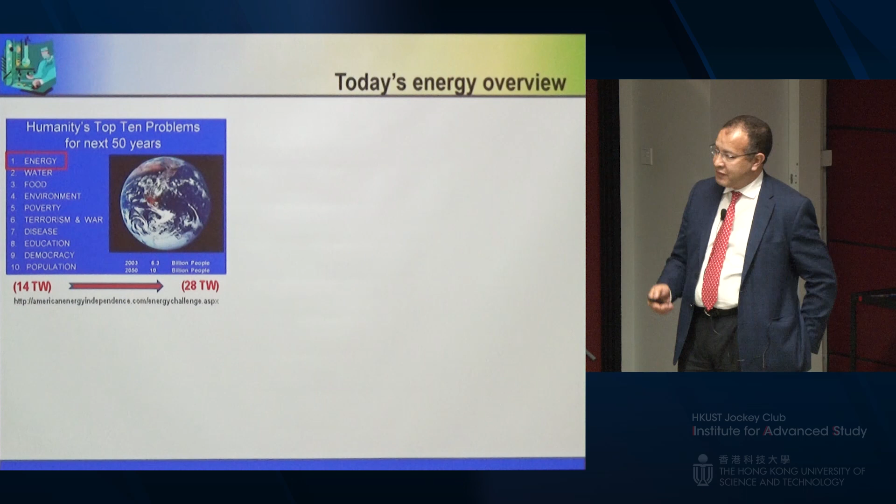The reason is within the next 50 years, the population will pretty much close to double to 10 billion, and the demand for energy will move from 14 terawatt to 28. If you look at the source of energy at the moment, it's still dominated by petroleum, coal, and natural gas. Nuclear energy is not popular at the moment, and the renewable, as you can see, is the lowest. Most of the renewable is hydroelectric and biomass. Solar and wind are very small, because there is no cheap, reliable, and efficient energy storage system to capture that energy and store it. You can see it also in this next one.

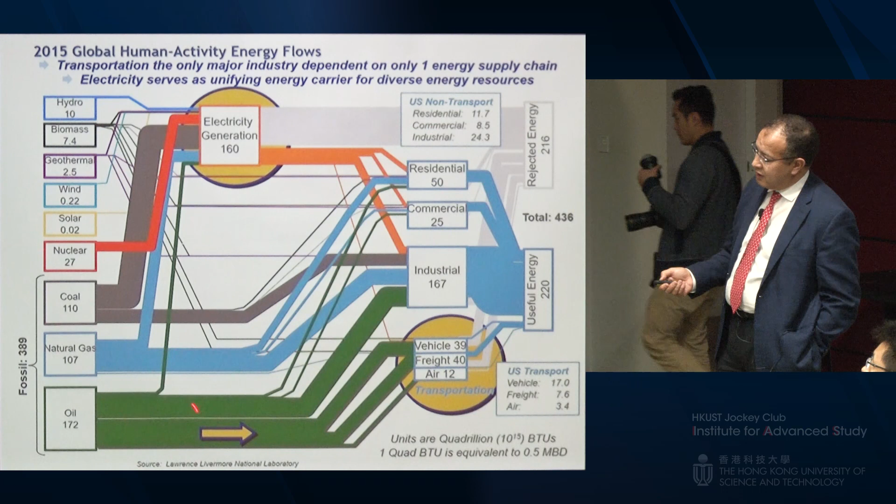You see the renewables participate very little in the energy resources for residential, commercial, and industrial. The big ones are oil, natural gas, and coal. For transportation, which is most important to us, the source of energy is oil, and the story doesn't end here because half of the energy is wasted in heat. So you use one source and you waste half of it. So the situation is very unsustainable.

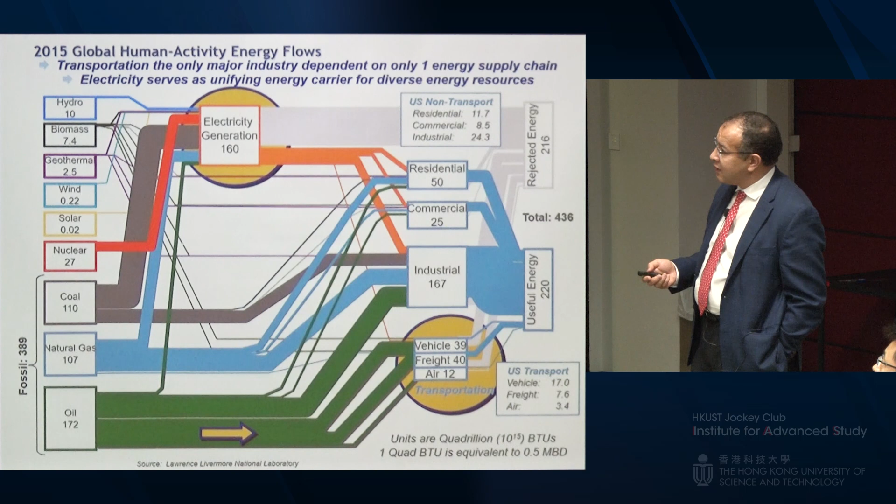In the United States, I think I've showed this before, we consume about 20 million barrels a day, and 72% of that oil goes to transportation. So if you really want to make an impact, you have to advance electric vehicles on a commercial scale.

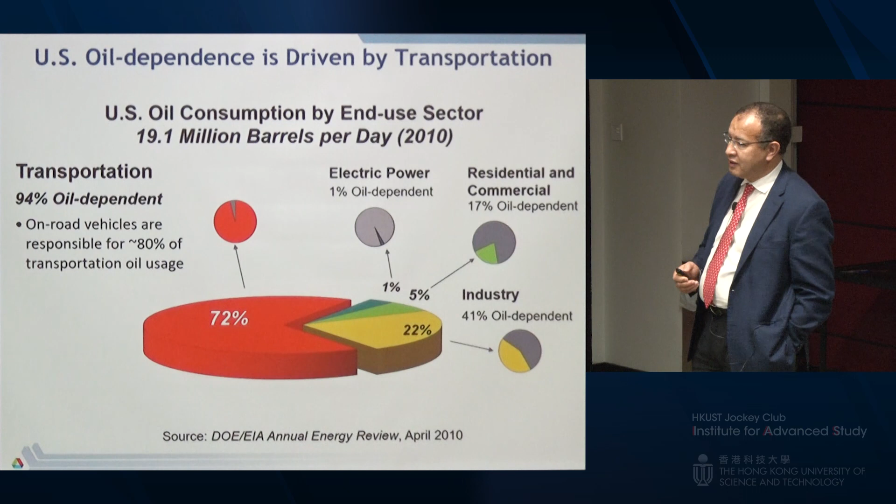The same thing with China. China, this is the trend of vehicle production. You can see China has actually already overtaken the US as the main producer of vehicles. And by 2020, they'll be producing over 25 million. And China actually imports more oil than the United States. Actually, the United States now exports oil. So the situation is getting very, very serious.

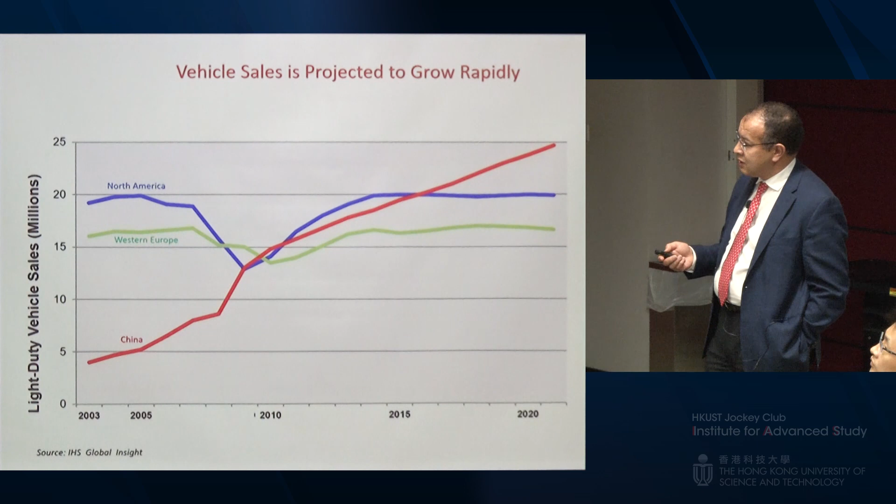Another reason why electrification is very critical is greenhouse gas emissions. This is the atmospheric CO2 concentration. If you stay business as usual, you will see that the concentration of CO2 will go to 700 ppm, and that translates to almost a 4-degree increase in the Earth's temperature. So obviously the consequence here will be that climate change will be very, very severe.

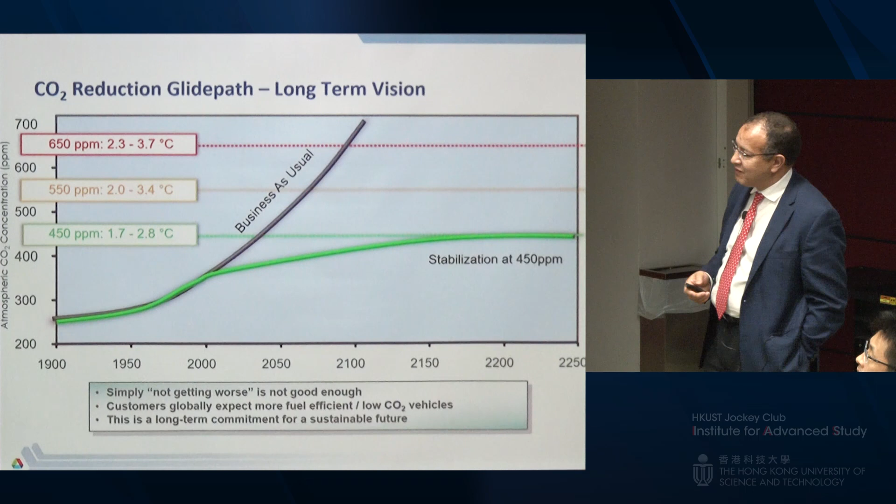But fortunately, electrification is underway. You can see it now. You can see a lot of Teslas actually in Hong Kong, which is interesting. And one of the main reasons is this, the regulatory requirement that was set mostly by Europe and China. The United States dropped this requirement thanks to our, I have to be careful because there is a video, our president.

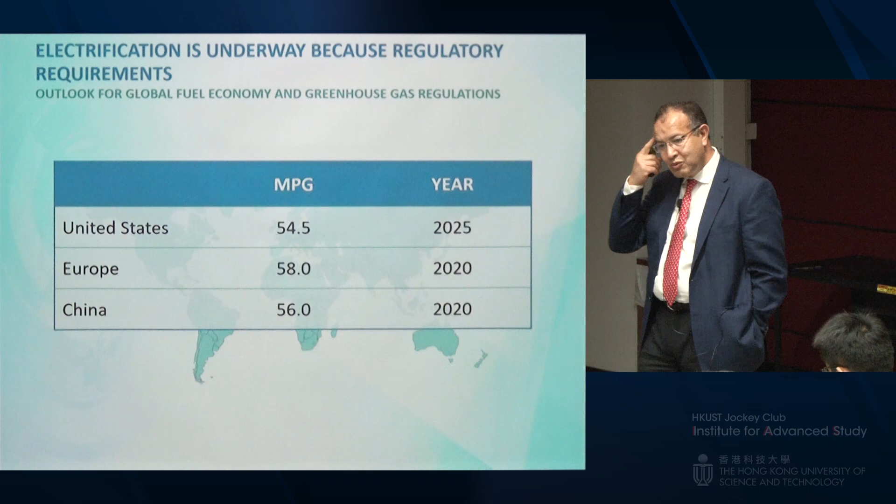But it doesn't matter because China is driving the electric vehicle. The requirement for China is 56 miles per gallon by 2020, in 2 years' time. It's not that much. There is also talk in China that they're actually banning the conventional engine within the next 15 years. Europe is a little more aggressive. It's 58 miles per gallon within the next 3 years.

The reason why I say it doesn't matter is because every single company in the world produces cars in China. GM, Ford, Chrysler produce cars in China. If they do it in China, they will just sell it in the US. So I don't see an issue. So the electric vehicle is moving forward.

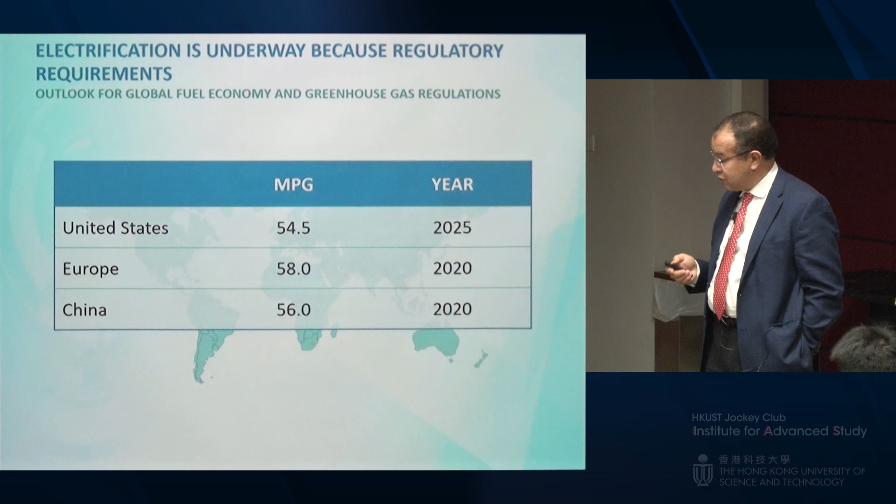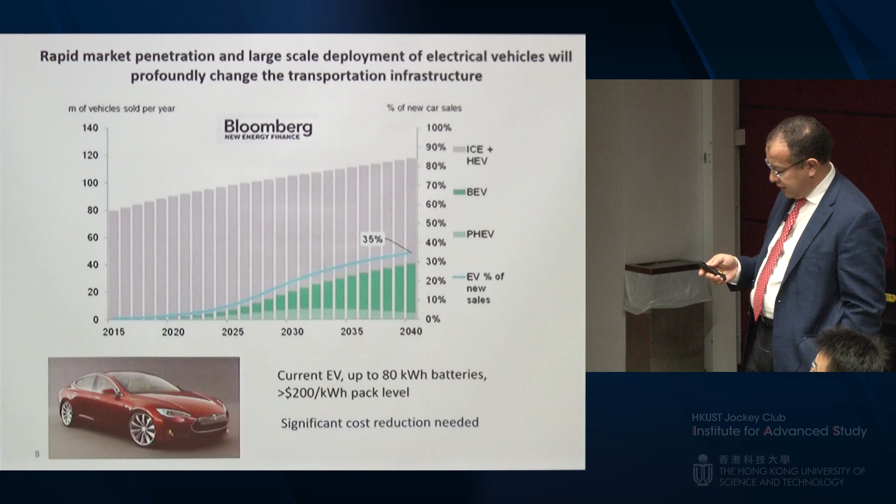And again, there are many types of electric vehicles. You have the hybrid, which is the most popular. You can see millions of vehicles now in the United States. We have over 7 million hybrid vehicles sold in the United States alone. The reason why it's very, very popular is because it's very cheap. The investment is very small, a powerful battery, and not energetic.

Usually 10% of the energy of this battery is mostly used to assist the main engine and recover the energy in regenerative braking. So you don't have to charge your battery. So that's very convenient and cheap. You can buy a Prius now in the United States for $18,000, and Toyota is making money out of it.

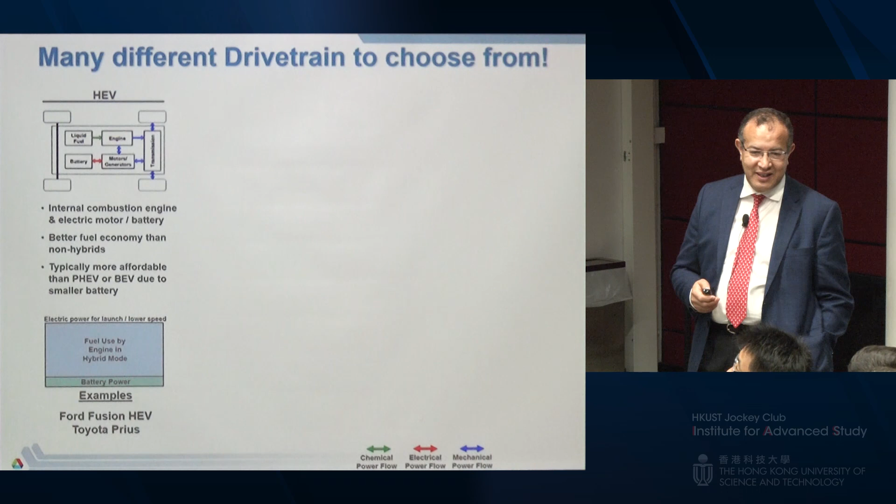The other system, which is much more complicated, is the plug-in. For the plug-in in the United States, the target is 40 miles because about 78% of commuters in the United States commute within 40 miles. But the technology here is very complicated. You still have an internal combustion engine. You have several electric motors, depending on whether you want four-wheel drive or two-wheel drive. You have a gas tank, you have a transmission, and you have a large battery.

So all of these are concentrated within a certain volume. So the battery has to be big enough to allow you to go all electric for 40 miles before you switch to hybrid in case you decide to go somewhere else, or you can go home and charge. So obviously the energy demand on the battery is very, very severe in this case, much more severe than in the electric vehicle.

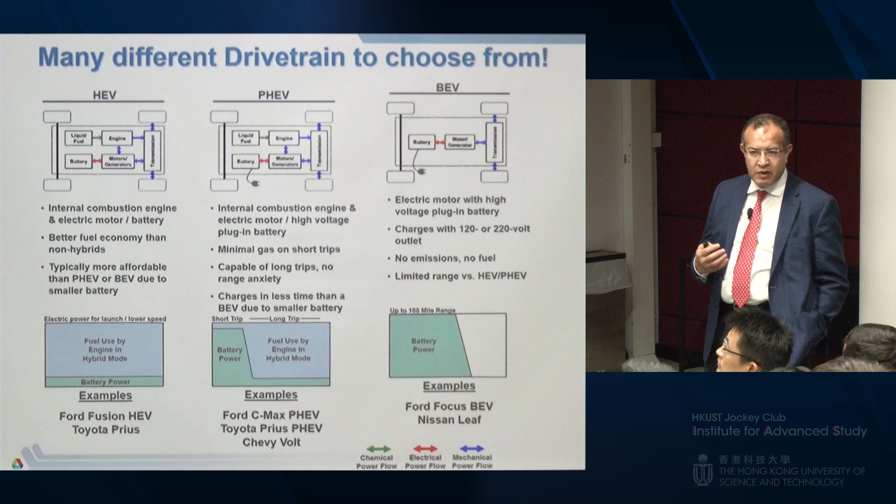The electric vehicle, you basically just have an electric motor and a battery. All the other things are taken out. So you have plenty of space to put a high energy battery there to allow you a longer electric drive range. But the popular one mostly uses the nickel metal hydride battery, which is a technology that is very low energy but very powerful. You can basically boost very quickly in this case.

The application obviously is very, very broad. Lithium-ion has basically dominated consumer electronics. So every single consumer electronic you are operating uses lithium-ion now. The next step is automotive, and we are seeing that at the moment, with about 20 models in the United States that use lithium-ion for hybrid, plug-in hybrid and electric vehicles. I'm sure in China there are a lot that use iron phosphate. And the biggest thing will be, of course, the grid. So I'm glad to see that you have a big program trying to develop storage for grid applications.

So one of the reasons why the expansion is still not very significant for electric vehicles and plug-ins is the cost. If you ask the car companies, the cost is the biggest barrier. You can buy a Tesla now if you can afford it, but not everyone can buy a Tesla. I don't know how much it costs in Hong Kong, but in the United States, it's $120,000. Yeah, so cost is critical. Safety and life, I think the companies have already made tremendous progress. You don't see a lot of cars burning.

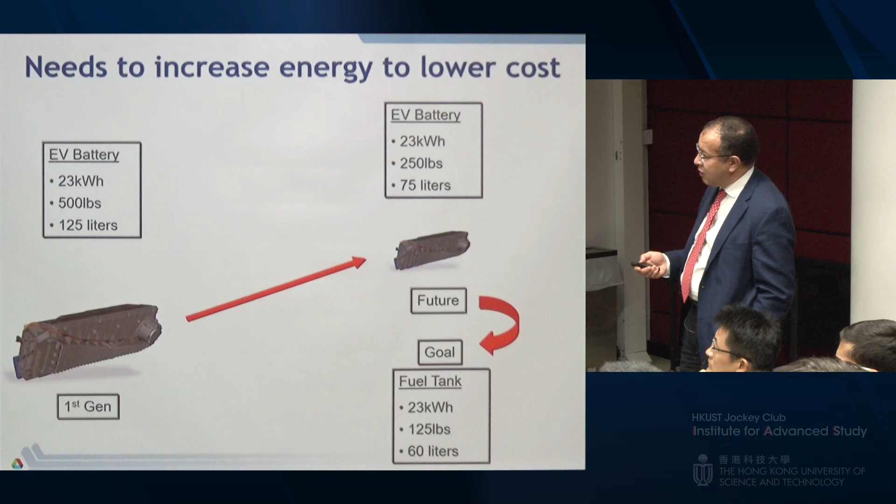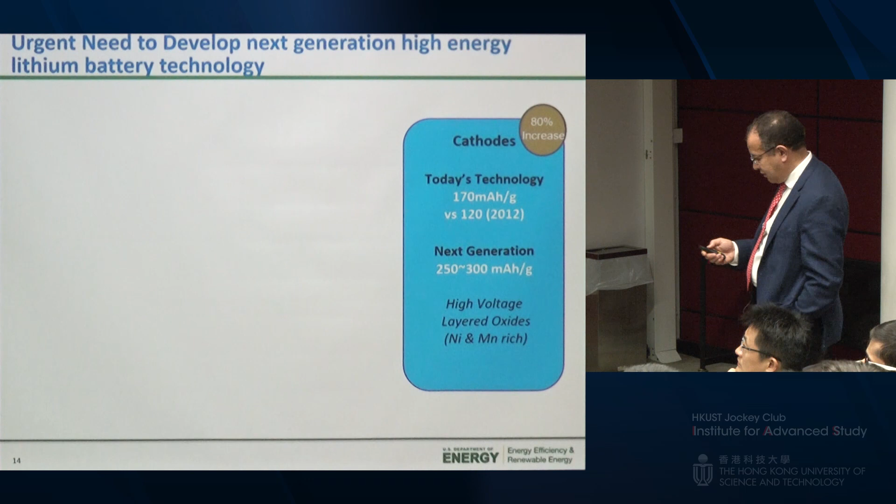So how to increase the energy? You can do that by increasing the cathode capacity. These are the conventional capacities at the moment. Moving to this is basically an increase of 80%. You can do that with the anode as well, moving from graphite, which has been the anode of choice for the past 30 years. There is a lot of effort now to move to metal or metal oxide-based intermetallic composite anodes. In that case, you have an opportunity to increase the energy density by 300%. So by coupling these two systems, you can make a significant impact on the energy density of the full system.

So I'm going to give you an example of things that we developed, which you are going to see in the market, and which have been licensed by several big companies. And there is a big effort to scale up what I'm going to show you. Then I'm going to mostly focus on beyond lithium-ion, because I know that some people here are working on sulfur and lithium-air, so I'll show you some exciting work there. Okay, let's start with the cathode.

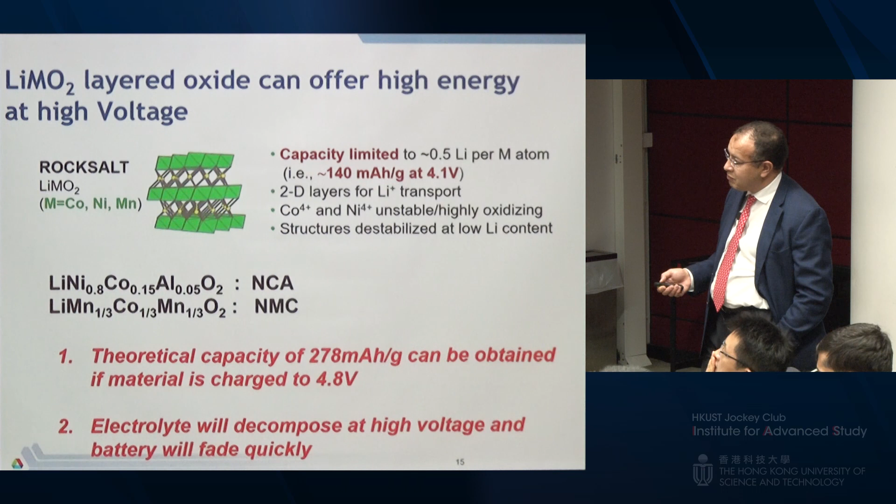Now, take for example NCA, this is the Tesla technology. They use a very high concentration of nickel. When you charge this system at high voltage, let's say 4.1 volts, you can pull a lot of capacity out of this system. If you go higher in voltage, you can get almost close to the theoretical value, but the problem is at this level the material is very unstable, so it decomposes the electrolyte. Here is an example. If you charge to 4.5 volts, you get a very large capacity, almost 230 milliampere-hours per gram. But then if you cycle it, it drops very quickly. So you get the energy, but you lose the cycle life, which is a problem.

So one of the reasons why the cycle life is basically compromised: we look at a material or an electrode here, once we disassemble the cell, and take one particle and microtome it in half and look at it by high-resolution transmission electron microscopy to see what is happening at the surface. And this is what you get.

You have the layers where lithium is basically sandwiched between the layers, and then you have another phase and another surface film. So through electron diffraction, this phase is nickel oxide. This one is basically R-3m layered oxide. So what happens is when you take this material, you remove lithium at high voltage, you create this phase, which is thermodynamically unstable. Nickel 4+ doesn't exist in an oxide phase. You have manganese oxide as 4+, but nickel always reduces immediately and generates oxygen.

So this phase here is nickel oxide, that's what you see here, and the oxygen reacts with the electrolyte and gives you a surface film. Now we have a very large SEI where lithium has to struggle to go through it during charge and discharge. And as a result, you lose capacity because your interfacial impedance grows significantly. That's how you lose the cycle life.

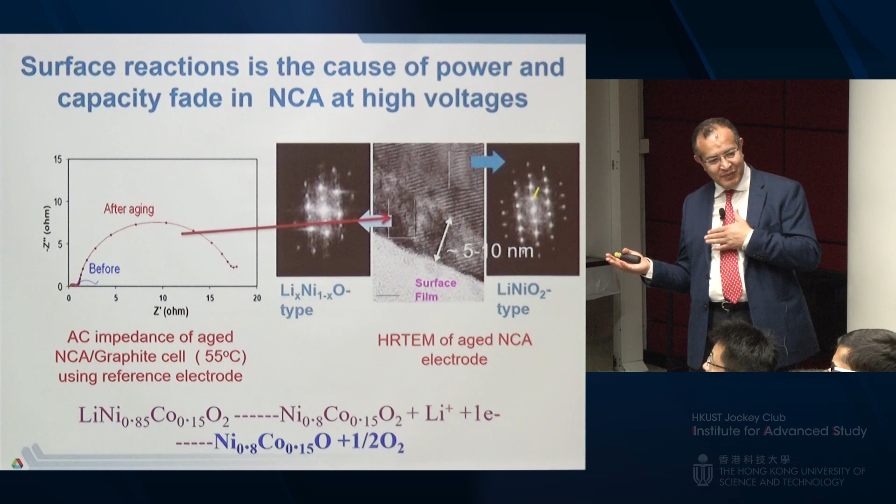Now, what we learn from all this is that when you use a very high nickel concentration in a cathode, you get very high capacity. But then you have a problem with cycle life. So to address this, we developed this material that now has been licensed and is being mass scaled up for application in electric vehicles. We call it a full gradient cathode material.

This is the first time where you have a material that has many compositions across the particle. You start nickel rich to give you the energy and slowly reduce it and increase the manganese to get more stability at the surface that prevents that reactivity with the electrolyte I showed you. So a very clever approach by engineering the particle.

And the reason why we go slowly is because there are volume changes. So if you make a big composition change quickly, you create a different gap in volume, and then you have a kind of separation. So you have to be careful about that. So that's the reason why we did a full gradient. The full gradient will allow you to put as much manganese depending on the particle size.

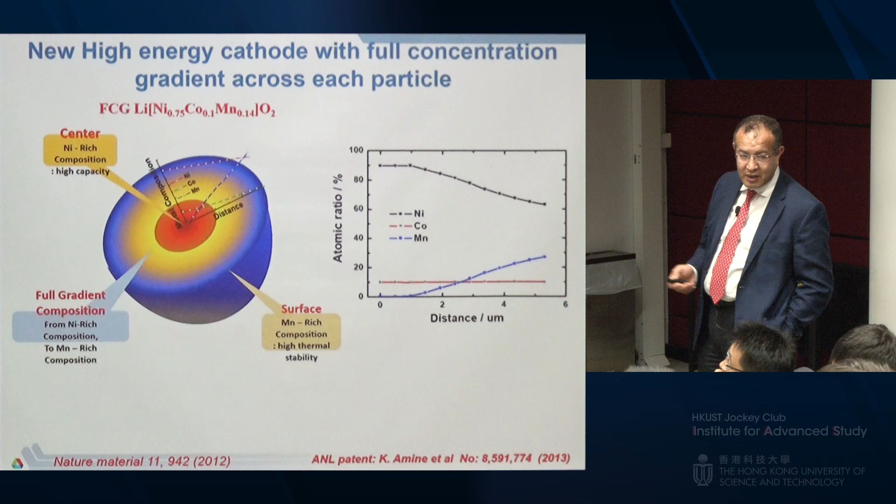So how do you make it? That's the next step. Could you scale it up? And you can just use a simple co-precipitation. This is a very well scalable and mass-produced technology for the NMCs and the NCAs that I told you about. In the case of nickel manganese cobalt that is commercially available for automotive now and consumer electronics, they use only this. They put 3 metals with defined composition in a sulfate form, and they send it to the reactor. You have a chelating agent and a co-precipitating agent, and you make basically particles.

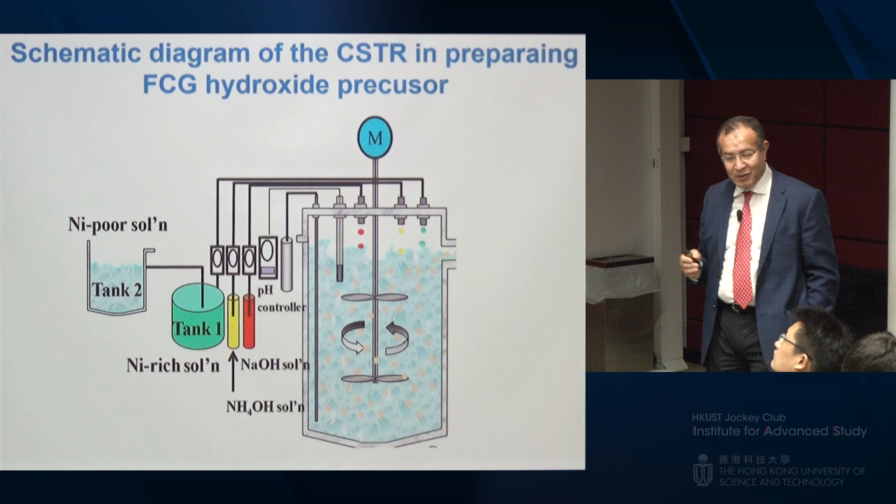So with this new approach, you just add one more tank. That's your investment. One tank that has nickel rich, so you can put the nickel first in the bulk, and then one tank that has manganese rich. Cobalt can be the same composition if you want to keep it constant across the particle. And then once you start moving the nickel to the reactor, you basically dilute the nickel with manganese and send both. With time, you're changing the composition. So one company that licensed it has already scaled up this material to 10 tons a day. So there is some serious work going on now.

Here is the comparison between the existing technology that is in electric vehicles now, like in BMW or the Chevy Bolt from GM. They use the 622 nickel manganese cobalt with 60% nickel. They're both made by co-precipitation now. This one is spherical in both cases, but if you look at the primary particles, in this case, they are spherical, small, where lithium will go through the grain boundaries. In this case, we have rods, so it's very different, but dense rods. That's the reason why the density is higher.

This is the same composition. This is the same average composition because the composition here is changing from the bulk going to the surface. Remember that. But the reason why we have high density is because of this structure. It's totally different from here. Now, density means energy.

Because you pack more active material in the electrode, keyword. The energy is capacity, voltage, and density. Remember that. If you use a nanomaterial, then you drop your density significantly, and therefore your capacity at the electrode level significantly as well. The other thing we've seen is that the gradient approach is also at the primary particle.

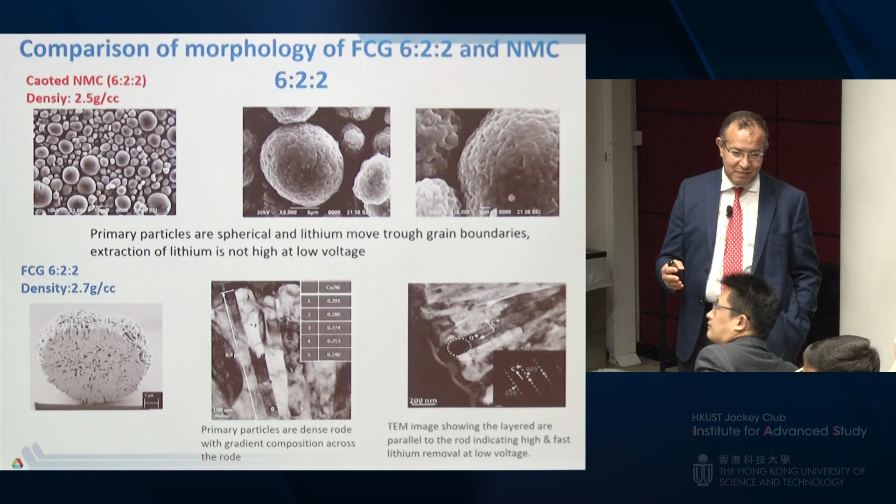If you look at the composition here, it's changing as well. So it's not only at the secondary particle, but the most important thing of all this is this. This is a TEM that shows this rod here; the layers are parallel to the rod, which means lithium will fly out quickly. And that's key to fast charging and discharging of the system. So you move lithium faster, which means at the same potential, you may move more lithium here than here, because here the lithium has to go to the grain boundaries, so you don't move as much.

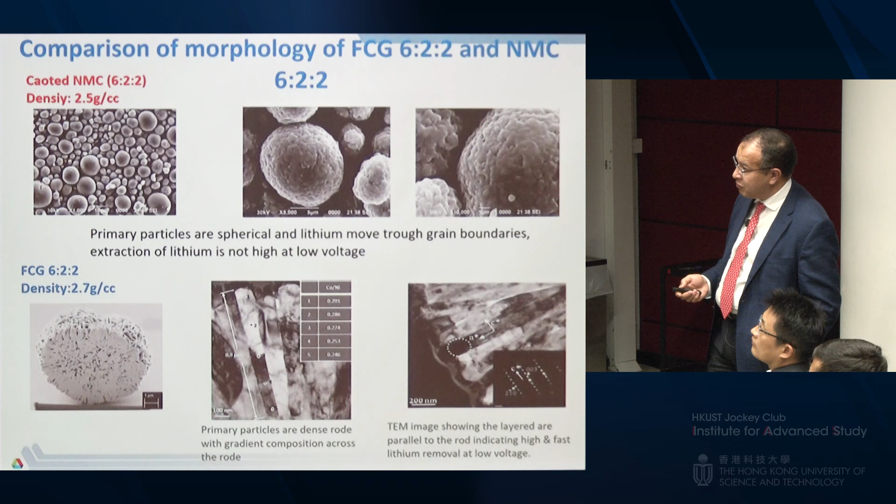Which means the capacity of this material at the same cutoff potential or voltage will be higher here than here. And actually, we've proven that. This is the capacity using exactly the same condition. With the commercial NMC 622, we get about 178 at about 4.3 volt cutoff. Here we get about 225 because of that specific morphology, which is very critical. So morphology of material can also impact the performance of the material. Remember that.

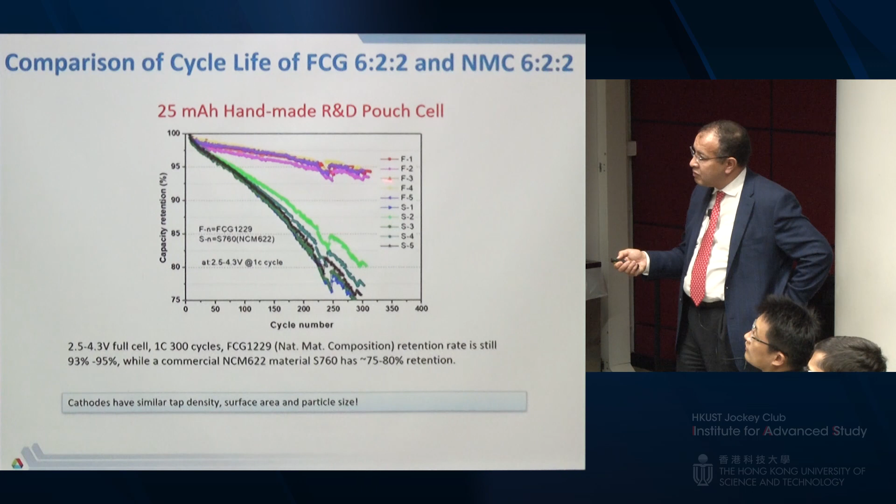So eventually after that, we start looking at what is the performance at the full cell. And this is a small 25 milliamp hour pouch cell we made at Argonne, and we compared the performance at 4.3 volt. You can see that the commercial one is dropping pretty fast. Within 300 cycles, we lost almost 25% of the capacity. With the new gradient, we have far much better results. We also work with the industry and build bigger cells. Well, let me show you.

Of course, one of the other reasons why we're trying to stabilize the surface is to enhance the cycle life, but also enhance the safety, because oxygen reaction with the electrolyte is exothermic, and therefore you can create a thermal runaway if you don't control it. So this is a DSC of these two materials, so we compare apple to apple. You can see clearly that in the case of NMC, when you fully charge it to 4.3 volt and then react it with the electrolyte, the enthalpy of reaction is higher, about 1,000. And the onset temperature is also higher, better than the NCA, but it's lower than in this case here, where you have half the energy and higher onset temperature. So the safety of this material is much better as well.

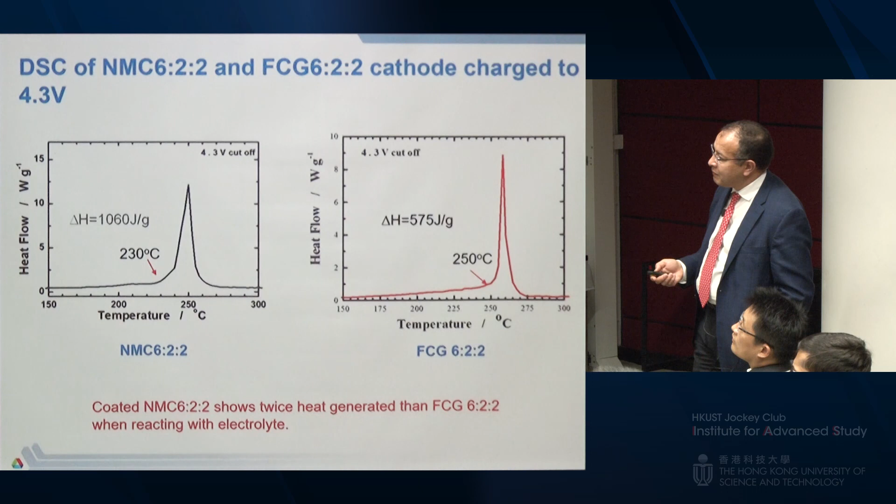So we hit two birds with one stone. We improved the cycle life, we increased the energy, and then we increased the safety. Three birds, I would say. We also looked at much higher concentration of nickel, 80%, because here you get much higher capacity, obviously. And we built cells. These are basically 2 amp hour cells, well balanced with electrolyte additives, because we operate at high temperature. And you can see we use the Umicore, which is very popular, as the reference material, and our full gradient at the same composition.

And you can see the conventional one that is under development by the auto industry drops very fast, because now you have more nickel. Therefore, the reactivity is much higher, while the new material is much, much more stable. Even the performance at high temperature is better than the performance of the commercial one at room temperature. So this is very important. The reason why I say this is very important: if you look at Tesla, they use NCA, which is 80%. And you notice they don't use big cells, because that material is very unsafe. If you have a large cell, it will explode. They use small cells, I think about 8,000 of them.

If you go and look under the hood of a Tesla, you see about 8,000 18650s. That's the reason why they developed, they're very smart, a matrix design to control all these thousands of cells. But when you have thousands of cells, the cost is very high, and that's the reason why Tesla is expensive. But imagine if you switch that material with this one here, where the safety is better and the energy is higher. We did a calculation, we dropped the number of cells from 8,000 to about 4,500. That's a significant cost reduction, because you can increase the size from 18650 to a D size, for example, from like 5 amp hour to 10 amp hour.

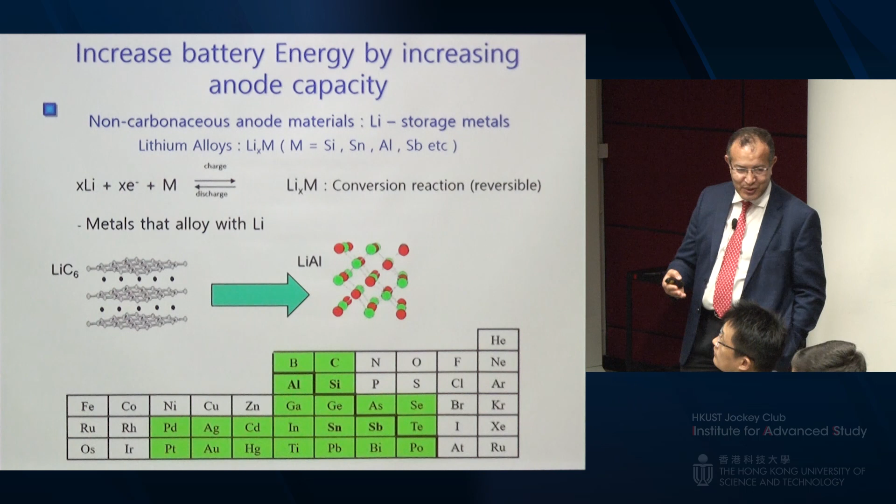You have a whole bunch of metals that you can alloy lithium with. And obviously, silicon is the most attractive because it's dirt cheap. You have plenty of it in the earth. And it also gives you higher volumetric and gravimetric energy density than other metals. It's almost 10 times graphite.

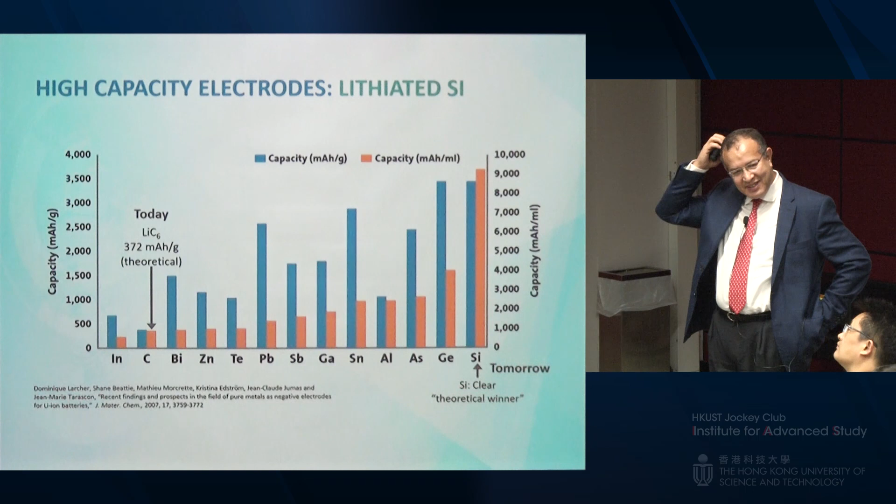So obviously, you're not going to use all this, and I'll explain why. The reason is simple. Using that much, you have no cathode to match this capacity at the anode side. It's impossible. You have to make a 1 millimeter thick cathode if you want to go there.

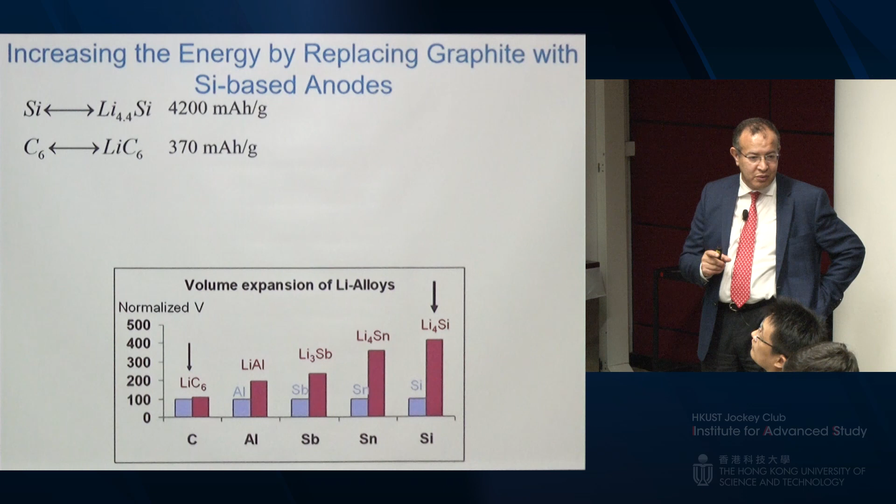Unfortunately, when you do the alloying, you get a lot of capacity, but you have huge expansion, volume-wise, almost 400%. That's not good. If you have a big expansion, you expect, after cycling, cracking of the particles and isolation. So when you isolate your particle, you lose conductivity, and that particle is dead. So your capacity will drop very quickly.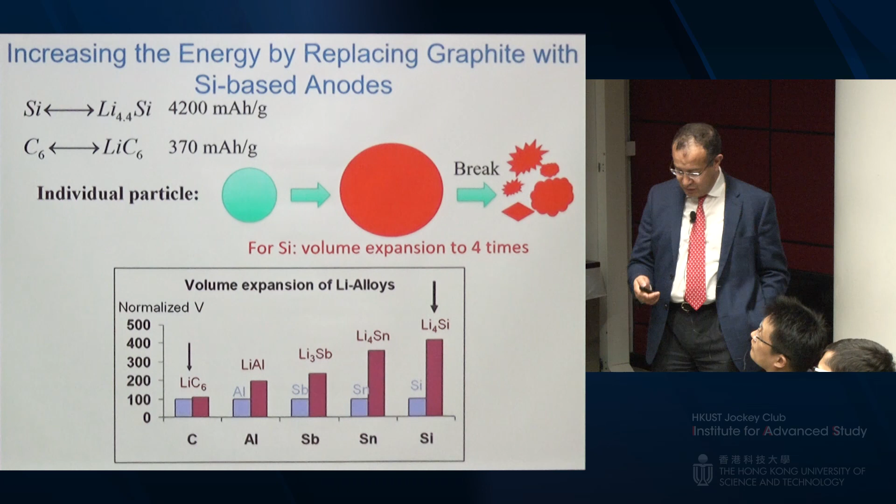Much work has been done in the literature, basically incorporating silicon in a carbon matrix to keep conductivity. They incorporate silicon in carbon fiber, nanotubes; my colleagues at Stanford use the yolk-shell type where they incorporate the silicon inside carbon spheres and so on. All this shows a very good result. I'm not sure about this result because the loading is very small. It's like using shallow charge and discharge. So one has to be very careful.

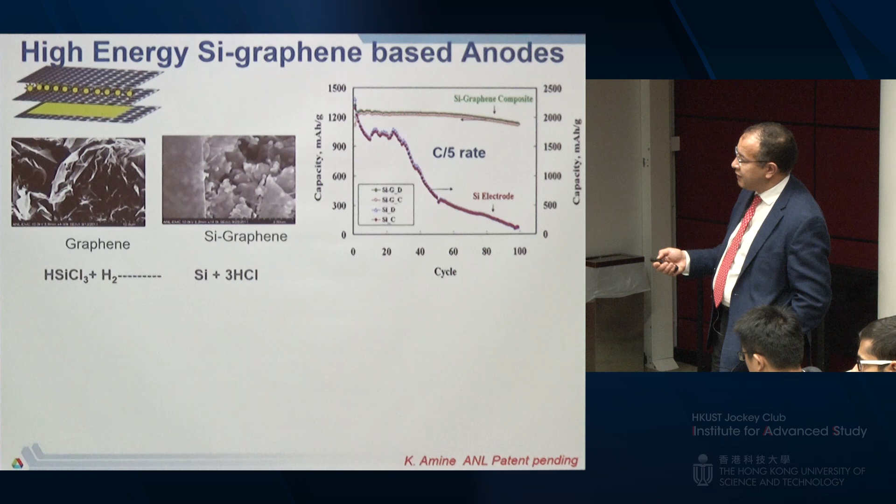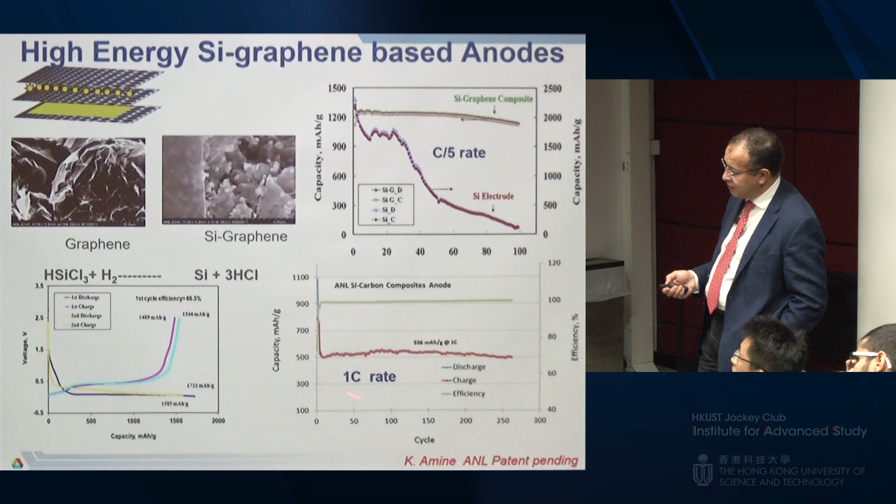So this is how it works in the silicon wafer industry. They have these tanks full of this gas. So they capture the byproduct, which is contaminated trichlorosilane. And then what you do, basically throw in graphene and heat it up at low temperature, drop in 10% of hydrogen, and then you form your material. Very simple. You hit two birds with one stone. You get rid of this dangerous gas, and you make a useful material out of it. And one of these companies has licensed it, and now they are in the process of mass scaling it. So you may see it actually next year.

So here is the other problem with silicon, the poor efficiency in the first cycle. Now, this is a discharge. The discharge is about 1,700, and the charge is 1,500. So the difference is about 200 milliampere hours per gram. This is one of the best samples, by the way. There are samples that have more than that. So imagine 200 milliampere hours per gram.

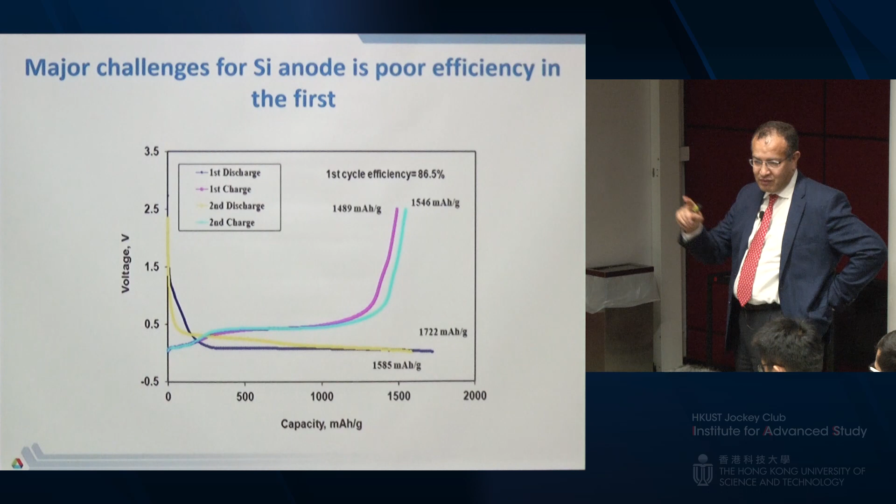If you use carbon, carbon is about 98% efficiency, and is only 360 milliampere hours per gram. So 2% out of 300, you can easily design an excess amount of cathode to take care of that irreversible loss. Here it is. In the case of graphite, it's 98%. So it's okay to use excess cathode, the lithium, to compensate for that irreversible loss.

But in the case of silicon, the capacity can vary, and the efficiency is low. There is no way you can use a large amount of cathode. You need pretty much double the capacity of excess cathode just to compensate for the first irreversible loss. Cathode is expensive and heavy, so your overall energy will drop significantly. So that's not the way to go. But I'm going to show you a very clever way of doing it based on our lithium-air work, actually.

If you use a cathode, that's the capacity. Use a lot of it, heavy, expensive. If you use lithium oxide, the capacity is very high. It's lightweight material, almost 1,600. So, unlike most people, who try to add lithium to the silicon and add electrolyte to basically suck the lithium inside the silicon to take care of the initial efficiency, here you take lithium oxide, you mix it with the cathode, you activate it, and you send lithium to the anode. It's a very different approach.

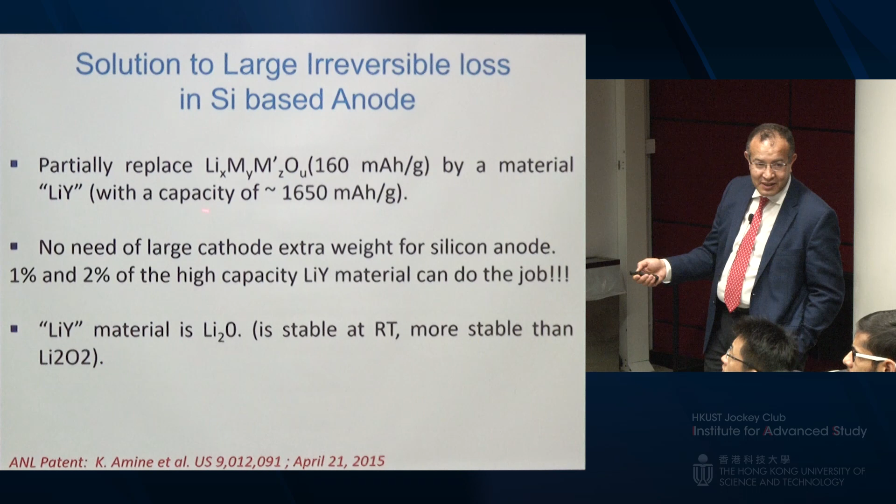So you can use this, or you can use lithium peroxide. Lithium peroxide will give you twice this energy, so the amount of material needed will be much smaller. Here is an example. We take a high energy cathode, we add a small amount of lithium oxide, and you see we get huge capacity.

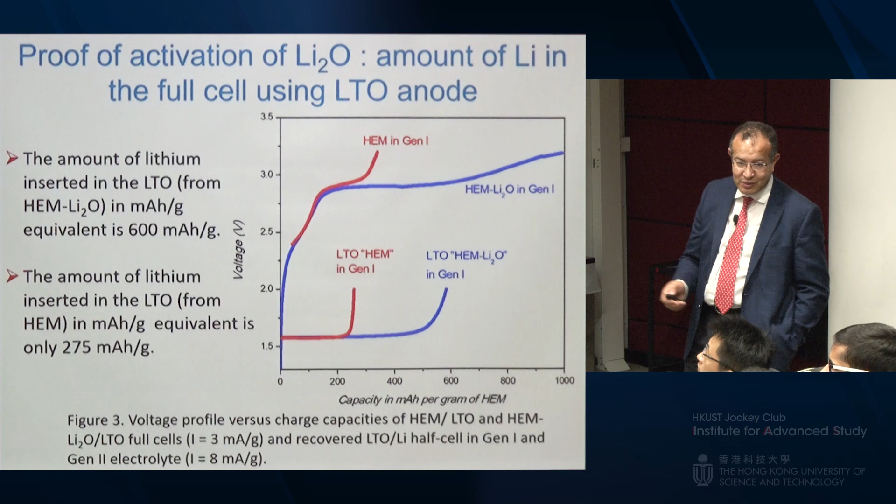Just 1%, you get almost 300 milliampere per gram. Obviously, you may think we are operating at high voltage, and therefore this could be just a decomposition of the electrolyte. So to prove that, we actually took LTO. LTO has 100% efficiency, so you can design your cell to get you the capacity you need. For example, in the case of high energy cathode, you can design LTO to match it, and you get about 250. That's the capacity of the cathode. So if you add 1% of lithium oxide, you can see there is a huge capacity, and you recover it at the LTO, which means that lithium really comes from that lithium.

And we took an example of a poor efficiency material that has 70%. We use it without lithium oxide. You can see we use a cathode that should give us 250 milliampere per gram. That's the high energy lithium-rich, manganese-rich cathode. But we got only 176 because we lost a lot of it to the silicon to take care of the irreversible loss. We add 1% lithium oxide, and you can see we recover all the capacity of the cathode because the lithium was able to provide the lithium to the silicon, and now you can cycle the capacity of the cathode easily. So this one also has been licensed because it's very simple. It's cheap, just 1% of material that is commercially available.

So if you take all these technologies and put them together, this is a company design, you actually can achieve 350 watt-hour per kilogram and 1,000 watt-hour per liter with this system. That's an increase of almost 80% versus the Tesla technology, right there. And at Argonne, we do have what we call BatPaC. I think this is open source. You can actually download it and use it. This is very nice because it has a huge design that goes all the way to cost. So you can design the whole pack. You take your chemistry, you put some parameters, and it will tell you where that chemistry stands versus existing technology. And it will also tell you the cost.

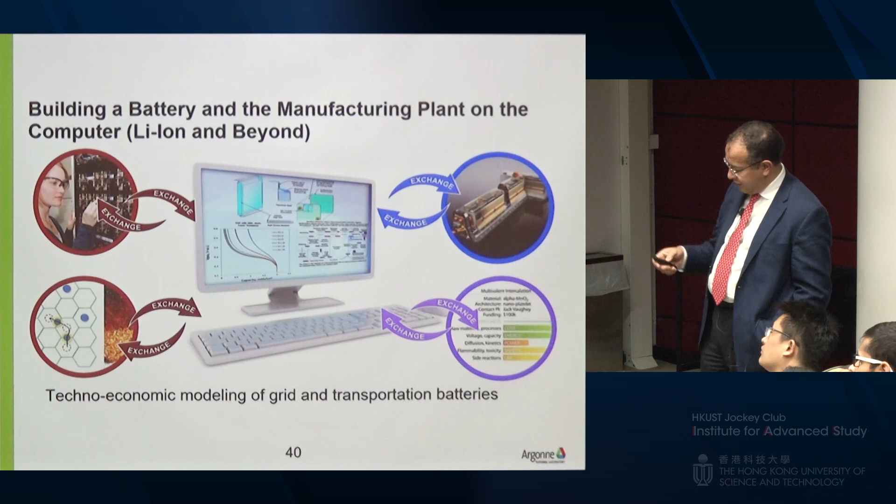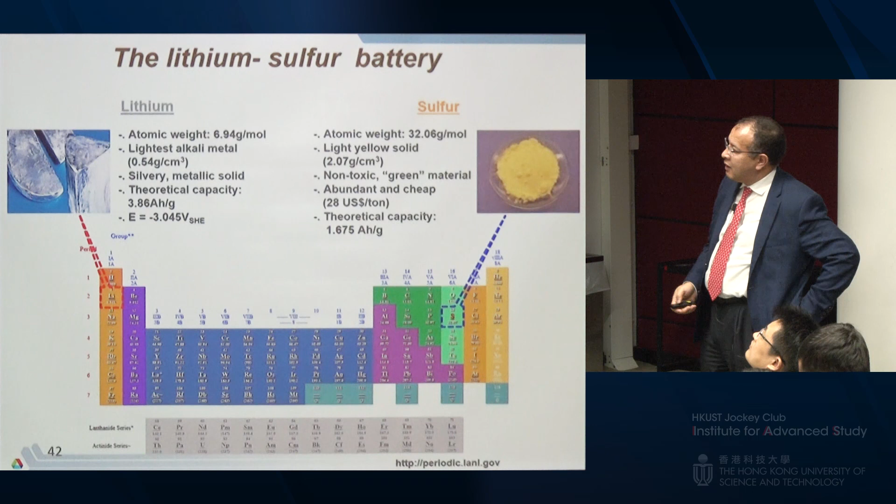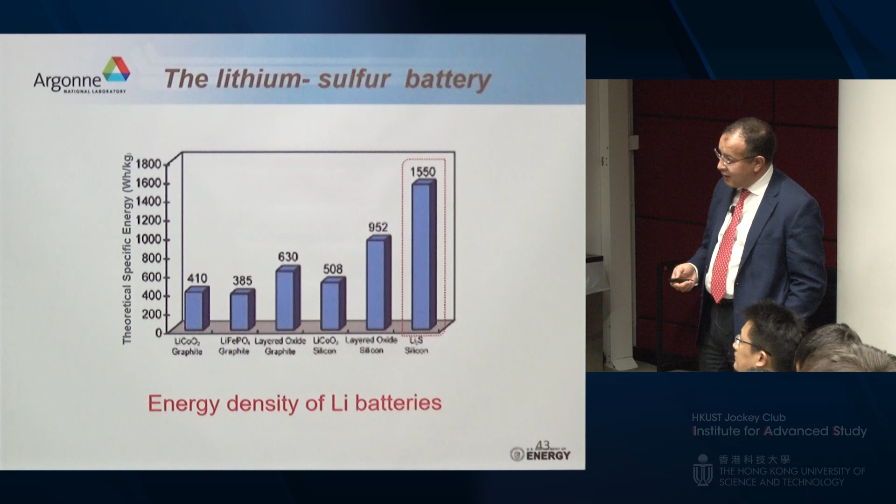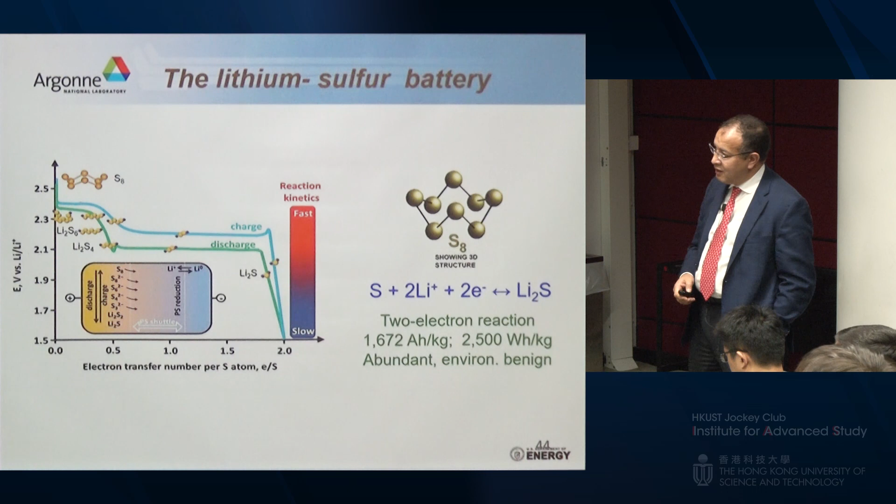Okay, why sulfur? Sulfur obviously is dirt cheap. I think you can buy it for $28 a ton. As a matter of fact, if you go to Saudi Arabia, they have mountains of it because it's a byproduct of the petroleum industry. That's one reason. And the other reason is it has very high gravimetric energy density, 3 times lithium-ion. Not only cheap, but it gives you 3 times more energy. And one of the reasons why it gives you that much energy is because it's a 2 electron reaction, not 1. During the discharge, you have multiple phases, polysulfide that is formed. And that's a problem.

I'm going to summarize all these issues here. You can see these are the challenges. One of the problems is sulfur is insulating. It's 10 to the minus 30. So you really have to put a lot of carbon to create some conductivity at the electrode level. So if you do that, you're going to use a lot of inactive material, and that can drop the capacity. Some people use 50%. So you have to maximize the active material in your electrode to get the energy you need. So that's not good. The other thing is you have to figure out a way to put high loading. That's one of the problems with sulfur.

And then there is an expansion of volume when you move from sulfur to Li2S, for instance, almost 80%. You have to take care of that as well. And then you have the polysulfides that dissolve, and they tend to shuttle to the anode and then stay there. And that's loss of active material. You're losing sulfur.

And the other big problem is lithium metal. The dendrite issue with lithium metal, that is a big issue. So you can see this is a very challenging system. So I'm going to show you, at least at the cathode side, we're able to take care of conductivity and dissolution issue, which are 2 major problems.

At the moment, most of the people, if you look at all the literature, pretty much without exception, and one advice to you guys, you have to think outside the box. You know, if you just follow what the other guy is doing, you're going to just be late because they've already done it. So if you look at all the literature, that's what they do.

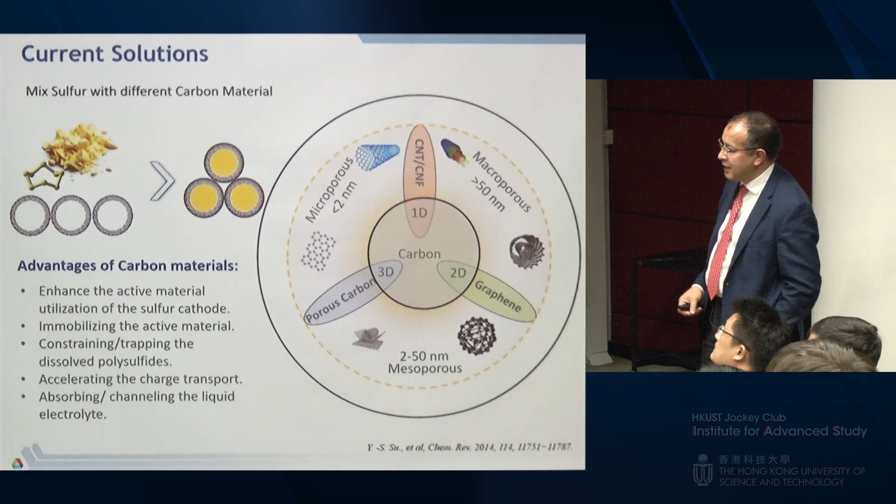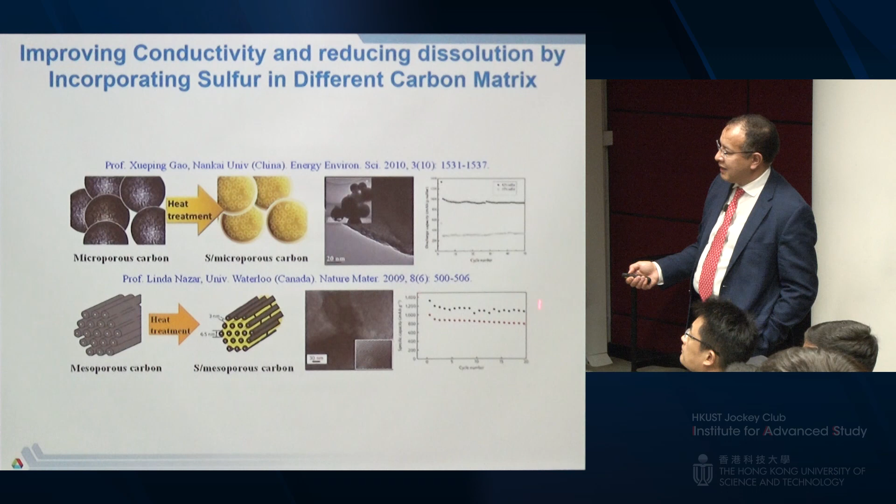Now, I'm going to show you a different way. If you look at the periodic table, sulfur is here and selenium is here. If you look at sulfur, you get high capacity, but the density is lower. Volumetric capacity is that much. Very insulating, which means you have to put a lot of active carbon to create conductivity.

And it melts at very low temperature. You have to worry about that. Because if your temperature of cells goes up beyond 115, you will melt your sulfur and basically short the whole system. Now look at selenium. Selenium has low capacity, but high density, so volumetric energy is the same.

But look at the conductivity. It's 20 orders of magnitude higher. So that should take care of the conductivity. And then the melting point is much higher, which means you have to worry about lithium metal before you can worry about this.

So the idea here is, obviously, one of the problems that I didn't show here, I should put it to be honest, selenium is $60 a kilogram, which is, you can buy 3 tons of sulfur with that. So that's the problem. The cost is an issue. But $60 is not that far from lithium cobalt oxide, which is about $50 at the moment. But in automotive, it's unacceptable.

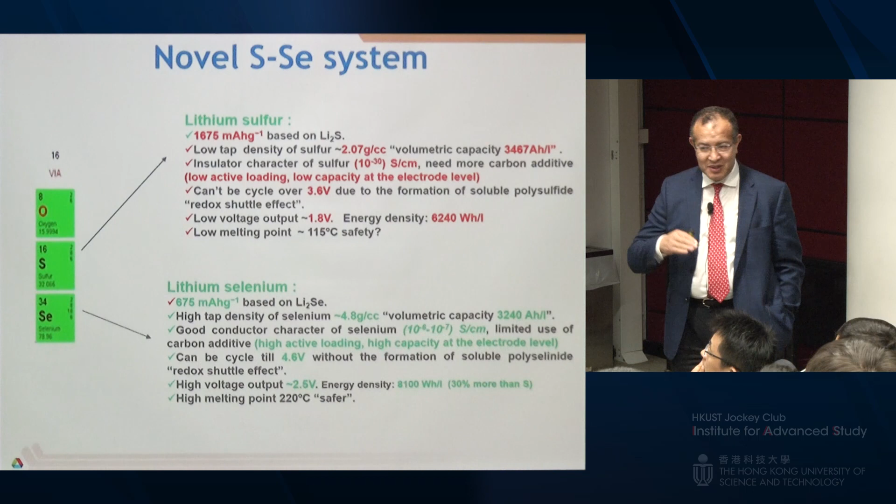So the first thing we want to know, is there any polysulfide or polyselenide dissolved in the electrolyte? And there are not too many techniques out there to do that, but at the Advanced Photon Source at Argonne, because X-ray will just look at crystalline phase. In this case, you get mostly amorphous, so you don't get much information. But you can use XANES.

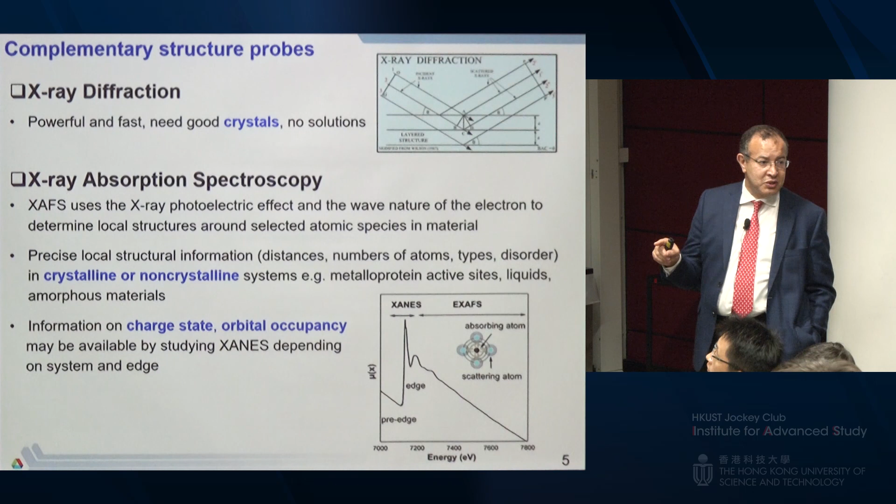XANES is a very good technique to look at the oxidation state, and it can give you that information at the crystalline phase, amorphous phase, and liquid. So you can probe the electrolyte and the concentration of the polysulfide and polyselenide and their oxidation state as well, in operando. So we do have this technique that we developed, and here is what you get.

So when you try to fit it with two-phase without any dissolution, it doesn't fit well, obviously. But when you add the polyselenide, it fits very well. Then you have a program to tell you at what time a phase is starting and what time it disappears, for instance. So that's a problem. We were very disappointed because we were able to improve the performance by putting high excess of the active material, but there is a dissolution, and therefore your capacity failed eventually.

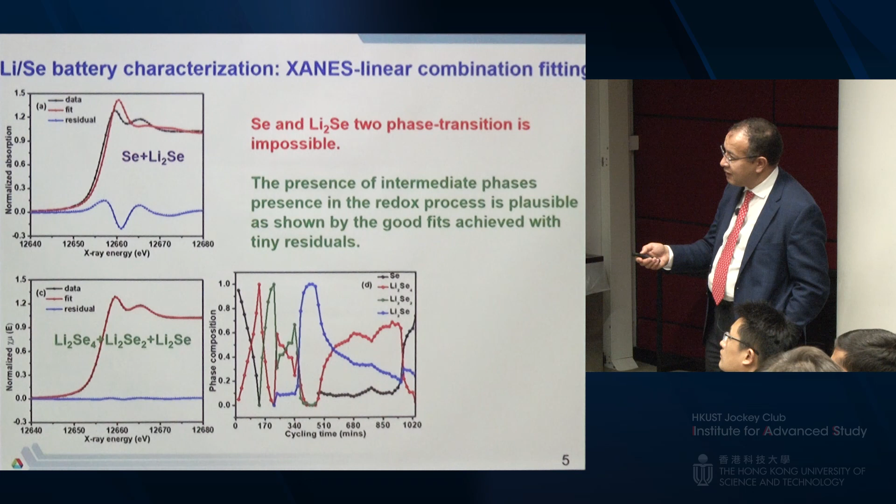Then when we ran the carbonate-based electrolyte, we've seen a different story. See, it's flat. We don't see those multiple phases, but the polarization is very high. So the performance was very poor because the impedance was very high with the carbonate. Now what we learn here is that if you use a different electrolyte, the story is different. So now we have a hope. We need to find the electrolyte that can work with this new system.

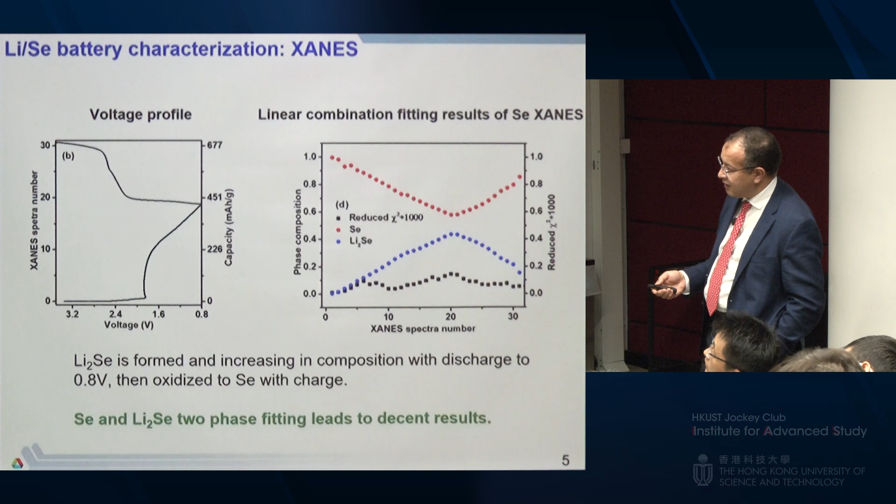And you see the fitting is just two phases in this case with the carbonate, but the dissolution does not exist here, and we did actually a dissolution experiment. If you take a carbonate and use polysulfide, it doesn't dissolve, you can see. When you use the ether-based electrolyte, it dissolves. So we confirm that with carbonate there is no dissolution, but with the ether-based there is dissolution.

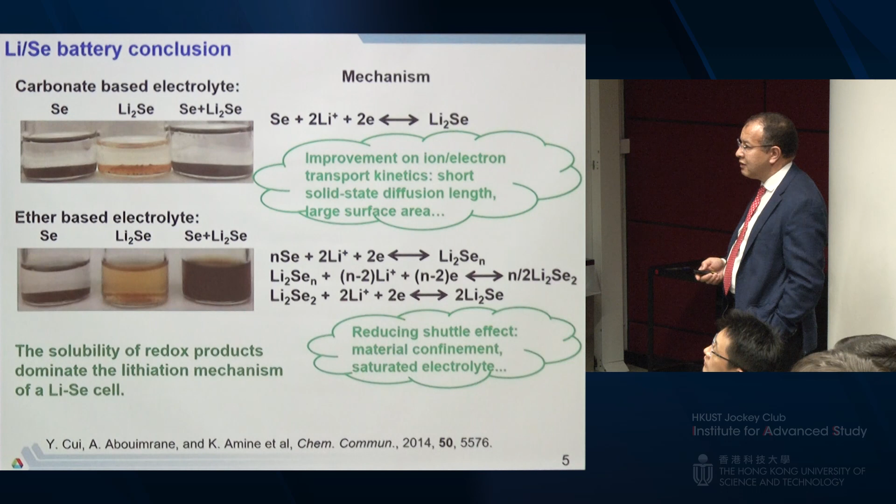So now what we need to do is design a new electrolyte that works, and we did. Here is a new electrolyte. We call it ANL-1 because we are patenting it now. I promise I will share it with you later. You can see clearly the pattern of the discharge is different to start with. That's great because it tells you have a one-phase reaction, basically, moving from sulfur or selenium-sulfur to Li2 selenium-sulfur. And we did an experiment that shows that there is no dissolution versus ether base.

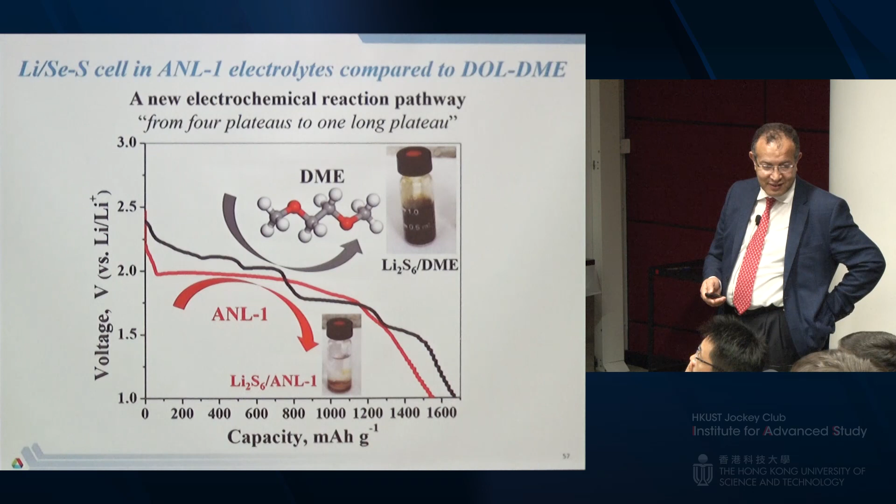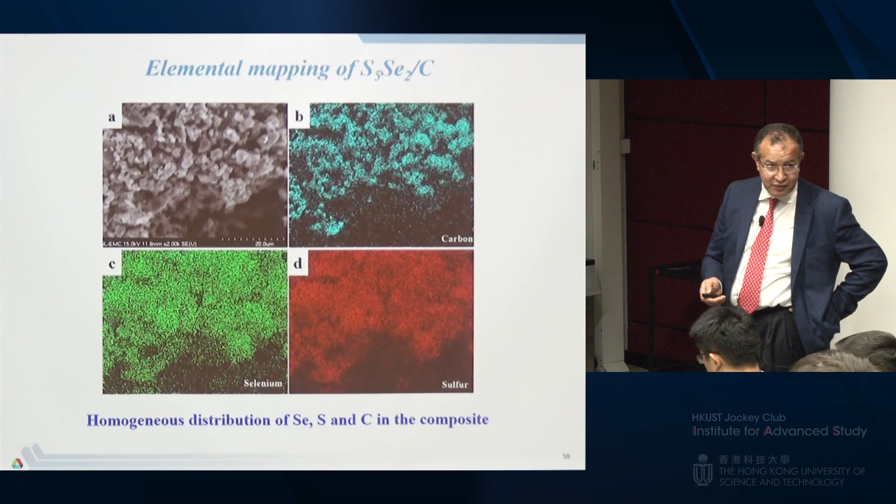So now we need to know if this material works. And so we incorporated it in carbon. We put about 10% of carbon with this system, so you can see the dispersion of carbon. But we don't put 50 or 60%, just 10% like in a lithium-ion configuration. We ran XANES and it's very flat, so we don't have any shift, which means there is no dissolution.

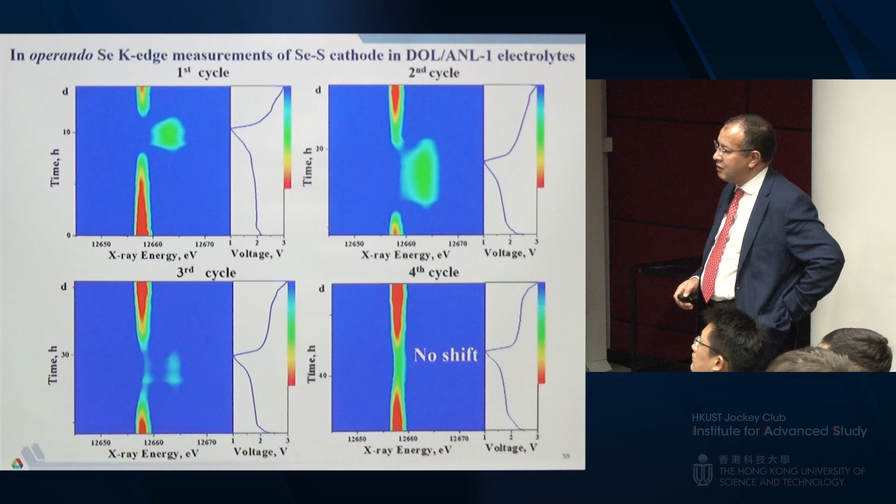This is the most important experiment because with the naked eye, there might be some dissolution you're not going to see. Because the color didn't change, it doesn't mean there is no dissolution. But here you are probing the liquid inside the cell in operation, and you don't see any shift that would indicate a change in the oxidation state of these phases. Okay, we did this.

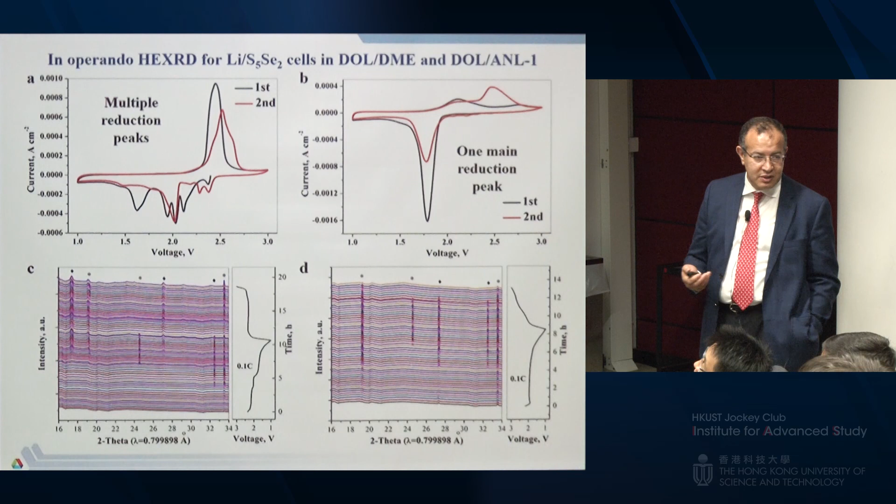We did some DFT calculation to see why we don't dissolve these polyselenides or polysulfides in this electrolyte. You can see the energetics is very high. So the barriers with this new electrolyte do not allow for dissolution of these phases. So now we have a selenium-sulfur that gives us conductivity, and we have this electrolyte that prevents dissolution.

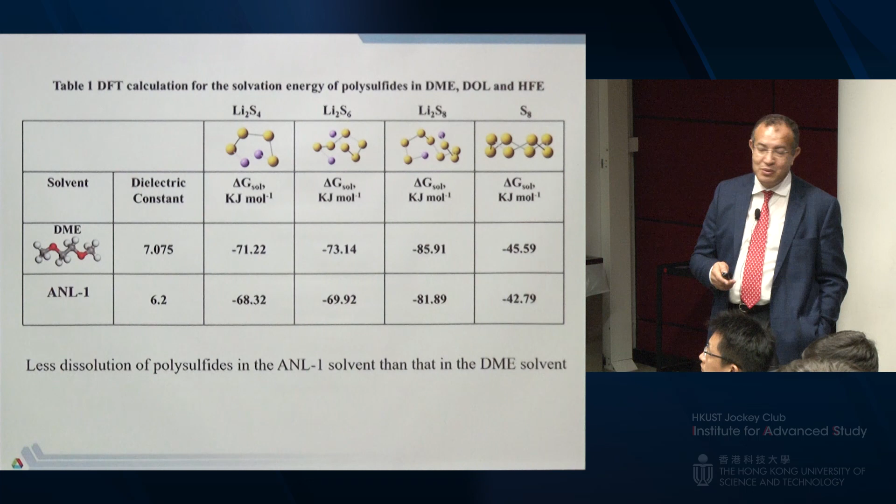So we cycled it, and you can see this is the ether base. You have a big polarization because of the shuttle effect. This one basically doesn't have any shuttle effect, and it cycled very well. Obviously, this is 5 sulfur for 2 selenium. We looked at a whole bunch of phase diagrams, and we looked at this one where we have no dopant. Selenium is really a dopant, so very small quantities.

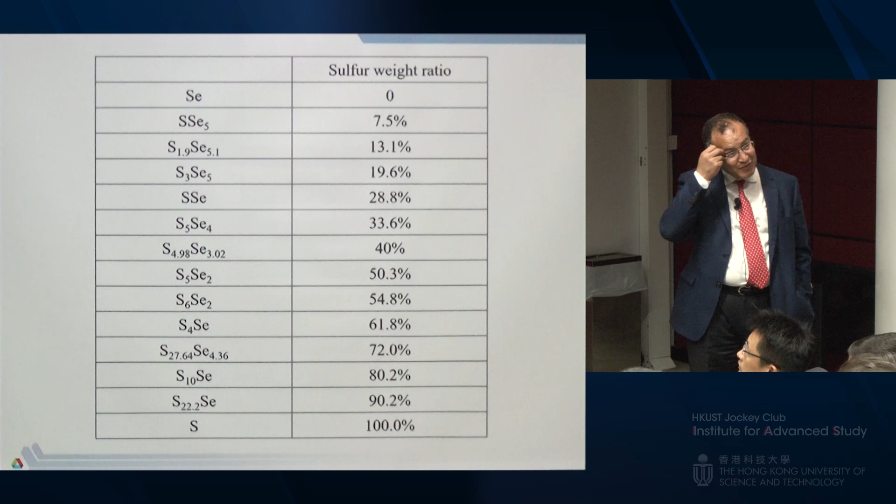You're almost close to sulfur, 90% versus sulfur. So capacity-wise, almost similar. And this is what we got, because here we are able to put high concentration or high ratio of active material, almost 80% versus 50% here, and we operate at 1C rate and a different rate. You can see clearly that this new system outperforms sulfur without dissolution.

So we're now trying to work with the industry to prove this concept in a full cell. Of course, we do have an issue of lithium metal, and that needs to be addressed. DOE now has a $10 million program just to address the lithium metal problem that is run by PNNL, and hopefully they will be able to fix this problem. Let's make this system very practical.

Okay, so now the last part is lithium air. Obviously, lithium air has a totally different configuration versus lithium-ion. Lithium-ion is an intercalation process between carbon and metal oxide. Here you have an electrode, which is porous carbon, and you put a catalyst. So basically you send oxygen, you have 2 electron transfer to form lithium peroxide. That reaction gives you 10 times the energy of lithium-ion. Now, that's very serious, 10 times. If you can just tap into 30% of that reaction, you get almost 3 times.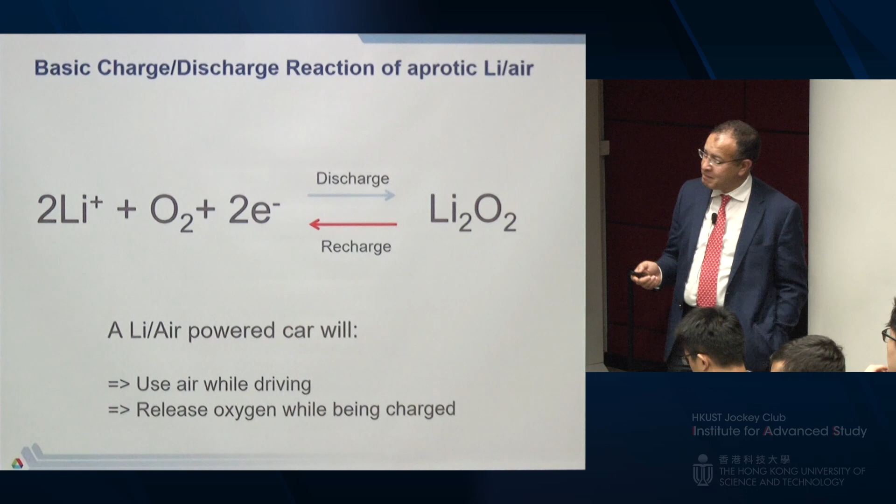But there are so many problems with this system. You can see the polarization is huge. You basically cycle 10 times, it dies. One of the reasons is when you form a discharge product, which is a peroxide, it is very corrosive. It attacks the electrolyte and destroys it. You have oxygen crossover that reacts with the lithium metal, forms lithium hydroxide, so you completely lose your anode. So that's why you die quickly. The peroxide does not dissolve in the electrolyte, so it stays and clogs the pores of the cathode, and now oxygen has difficulty moving in, so the feed becomes very low. These are just a few examples. You still have lithium dendrites from lithium metal and so on.

So clearly, the good news is the papers on lithium air are increasing significantly. There's a lot of interesting things to look at. So I'm going to show you a way to a new system. So these are the ideal reactions for lithium air. You can have the first electron transfer to a superoxide radical that can react with the electrolyte, very corrosive. Or if it reacts with lithium, you form a lithium superoxide. Lithium superoxide is interesting because it's conductive, so you can easily dissociate that bond, and it is less corrosive versus peroxide. So if you are able to stabilize this system, you are in good shape.

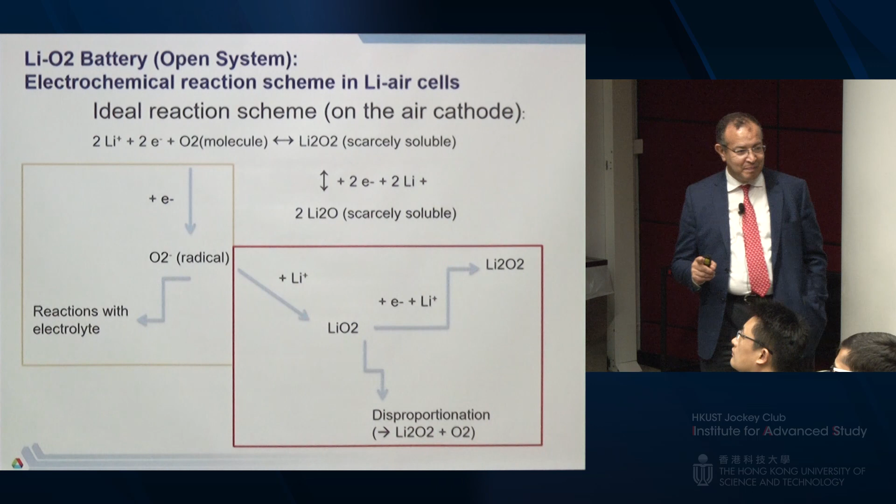The problem is, if you look at the literature, if you form an amorphous lithium superoxide, it disproportionates almost instantly, within a second, and you form lithium peroxide and release oxygen. But what happens if you stabilize this system and go this way? You notice here there is no oxygen. That's a closed system, like lithium-ion. And the energy out of this system is very, very high. Because in lithium air, we still need a tank of oxygen. That's a hit in energy right there. So what we decided to do is see if we can stabilize it.

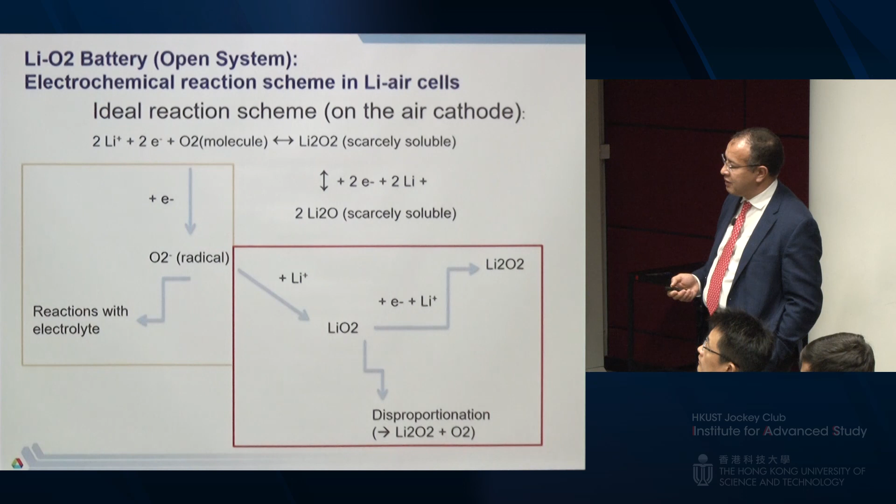We did some computing. My colleague Larry did the calculation to see if the crystalline phase of lithium superoxide exists, and if it exists, what are the energetics? Are they favorable for stabilizing it? So we tried to stabilize this phase in a crystalline phase and see if it's stable. So we developed a technique where we put iridium catalyst on RGO, reduced graphene oxide, as the cathode. You can see here these are clusters of few atoms, maybe 9, less than 2 nanometers.

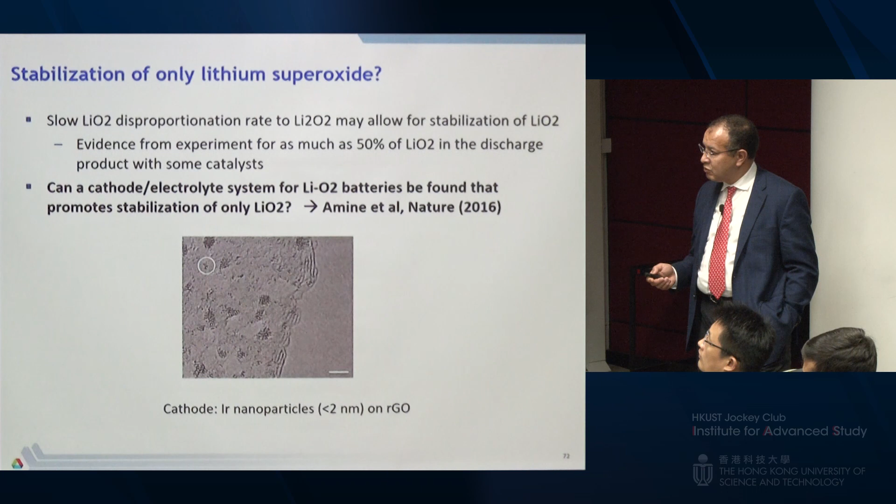And the first experiment we did, we were very surprised. This is what you get without the catalyst. Huge polarization, basically the same like everyone is observing. But with this catalyst, we've seen a significant reduction in the polarization. And the cycle life was very good, and then it died because of oxygen crossover, that we don't have a

membrane. So once we changed the lithium metal, when we opened the cell, we find basically a powder on the anode that's lithium hydroxide. So when we change it, refresh the lithium anode, we continue cycling this system for almost 200 cycles.

So the first thing we need to do is, what is the morphology of this new system? Because in the lithium air, the lithium peroxide has a donut type shape, like this. That's what you've seen in most of the publications. But in our case, we've seen a totally different morphology.

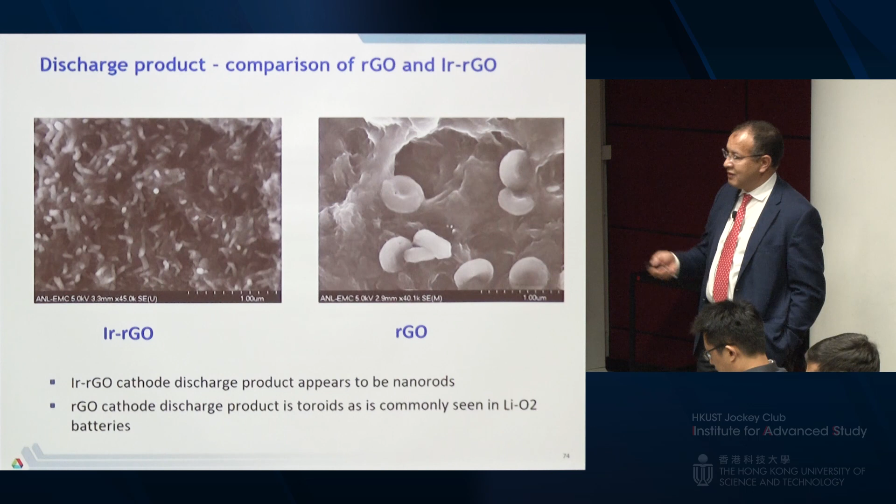These are basically nanorods, very small nanorods, and highly dispersed. But they are actually very close to the catalyst. When we look by TEM, we've seen most of them are basically built on the top of the catalyst, which is iridium. So the second thing is what type of discharge product we are getting here, because it's very different

from lithium peroxide. So we applied the Advanced Photon Source, hard X-rays, and you can see we did not see the lithium peroxide, but we see a new phase, which is exactly like what we predicted by calculation, which is lithium superoxide. As you see, it's crystalline, obviously, and it stays stable for 7 days. Eventually there might be a disproportionation with time, but it's stable. That was an interesting thing.

And the next step was we ran a Raman, and you can see the signature of lithium superoxide as well in this case. So those are the two proofs, but we had to buy a DEMS because we tried to publish this in Nature, and the reviewer would not accept this result. He wants a DEMS to show that there is one electron transfer.

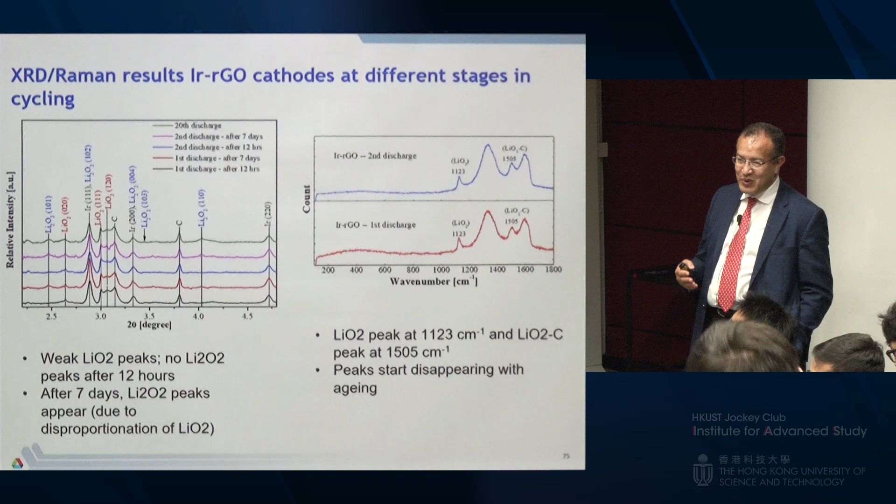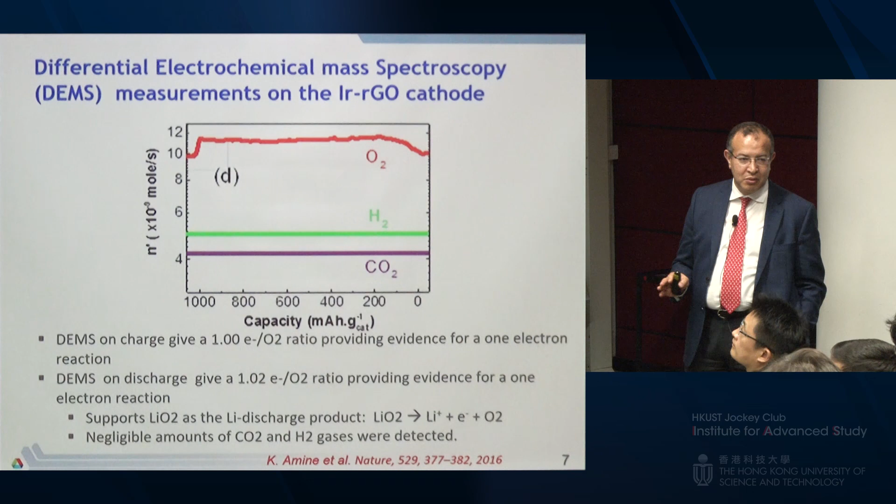So I spent $200,000 to buy a DEMS, and we did, and we were able to show that it's one electron transfer, which is great. Now we have it. You guys are welcome to use it. It's an institute, and that was a proof that we do have one electron transfer.

So how did that happen? What is the reason why the lithium superoxide is stabilized? So we went back and looked at these electrodes, because we've seen most of them are at proximity of the catalyst. And we look at the catalyst itself, it changed. It became Ir3Li. So there is a reaction. The catalyst actually changed in situ during the initial cycling. We have a different catalyst.

But if you look at the structure of this catalyst, and look at the lithium superoxide structure, they have a lattice match between the two. So basically, the superoxide is capped on the top of the catalyst. And that's the reason why we've seen most of them there, because the catalyst is highly dispersed. That's mainly the reason why it's stabilized.

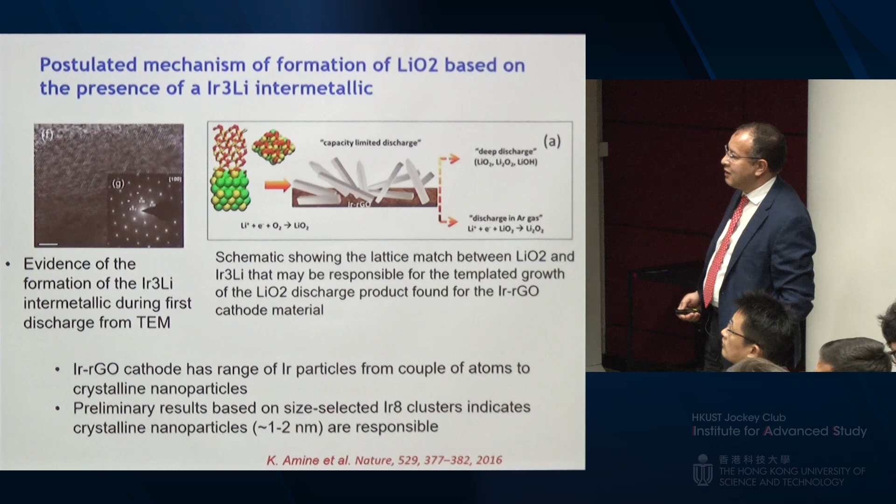So we did some DFT calculation, and we've seen actually when you have a crystalline phase of lithium superoxide, the energetics is very high. It's very difficult to disproportionate. We did also some DFT density of states to show that if you have a superoxide, it's half metal, it's conductive, so the dissociation is easy, and that's the reason why we've seen very good cycle life. While the lithium peroxide has a large gap, it's almost resistive. It's extremely difficult to dissociate.

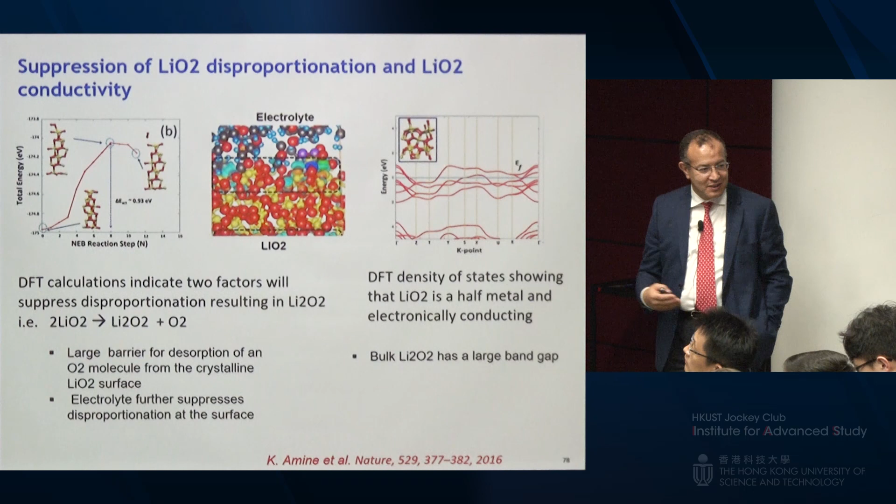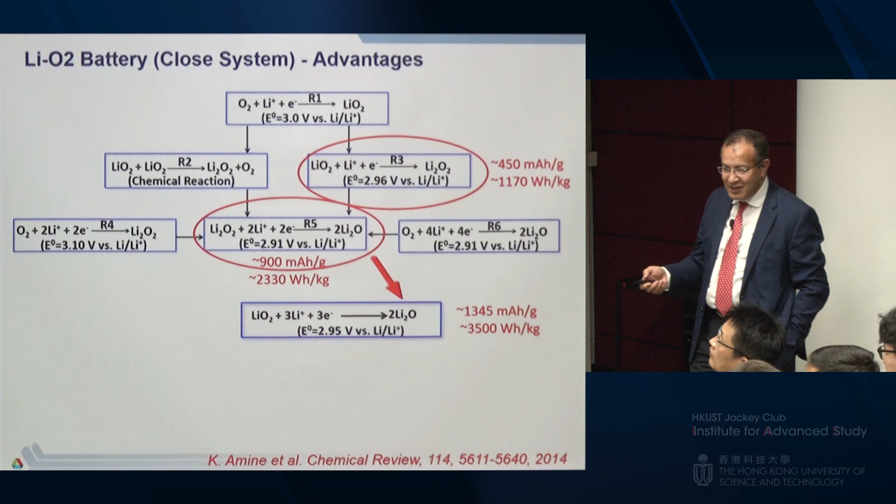So now I go back to a single closed system. If you are able to make this, you get 1,100 watt-hour per kilogram. And then if you are able to go further by putting 3 electron transfer, you get 3,500 watt-hour per kilogram. So if you just get 10% of this, you basically reach the best lithium-ion that I showed you in the first part, which is 350.

So we decided to prove the concept. So if you just go this way, you can reach 500 watt-hour per kilogram at the cell level with this reaction here.

So we decided to prove the concept, and we did that using a new catalyst, which is cobalt oxide. It's not the best. As you can see here, the first reaction shows about 600 milliampere-hour per gram. Obviously, we need to target 1,800 to get those 500 watt-hour per kilogram I'll show you. But it cycles extremely well. And you see through NMR, you move from lithium superoxide to peroxide and back. So that's the proof of the concept at the moment.

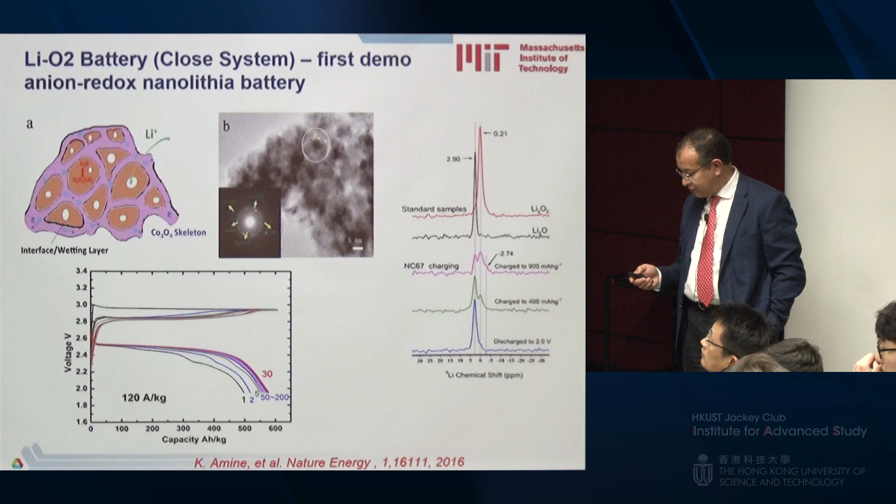So now we're working on a different catalyst that is not noble, because iridium or platinum is very expensive. We don't want to go back to the fuel cell problem, to see if we can activate more capacity out of this system. So with that, I will conclude.

I've shown you here that the electrification of vehicles is really underway, so there is no return, regardless of Trump or no Trump. We need to reduce costs, which is critical. If you want to expand the electrification, cost is critical. I've shown you a new high-volume, high-energy lithium-ion chemistry that is going to be applied in a vehicle in 2 or 3 years. It's under production now. It's been licensed by 3, and there are more people who want to license it.

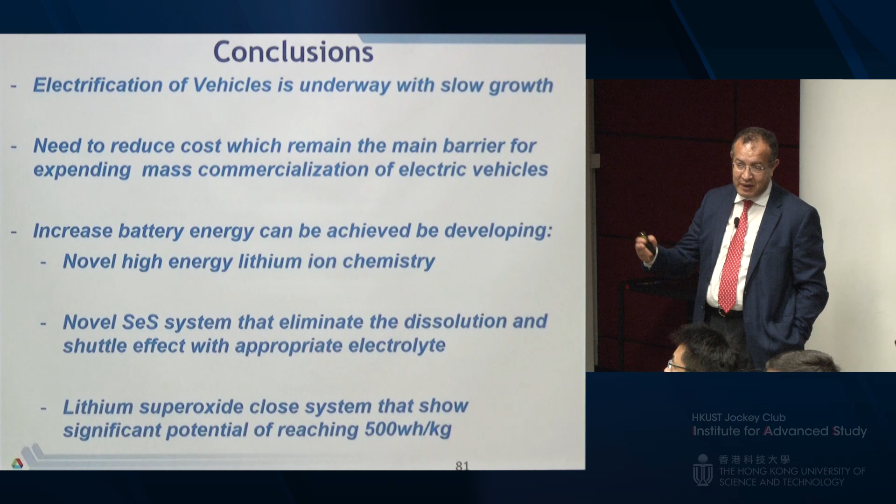We just started. I'm pretty sure other people will work on it, but we have demonstrated that we can use a closed lithium superoxide system, where you use basically the configuration of lithium-ion, to make a real high-energy system that can give you much, much lower cost and hopefully can be used in your grid. All right, and thank you very much.